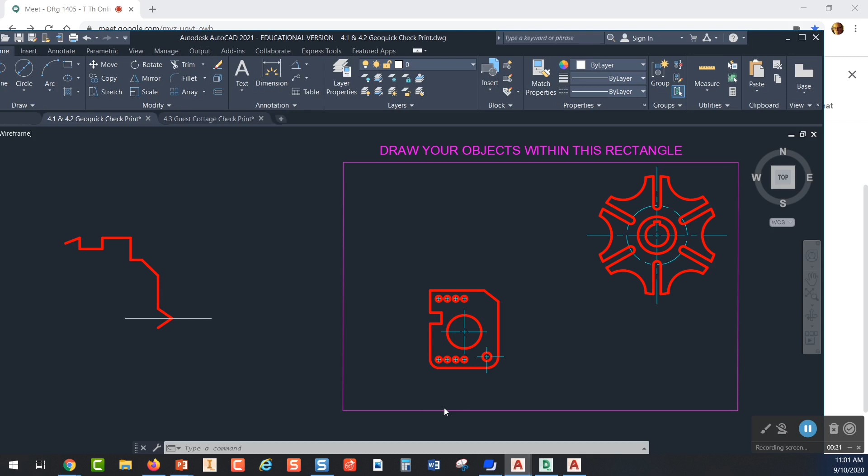All right, so in drawing the Dino Pig, the purpose of that drawing is to throw you into a bunch of opportunities to use the three principal ways that you draw lines. And first of those lines is direct entry. Let me expand my monitor here a little bit. When you're doing direct entry, of course, you pick on a line and you pick a start point, and you just move to the right or the left or up or down and type in a distance and press enter.

It's very simple. But the thing you want to make sure that you're doing to ensure that those lines are truly horizontal or vertical is to make sure that this icon right down here on the status bar is on. And if it's on, it will be blue, and this is called the polar tracking icon. And polar tracking allows you to snap to horizontal or snap to vertical, but it also gives you the freedom to move in between those points.

Now, I want to show you another alternative to that, which is this guy right down here, which is Ortho. And now I don't have Ortho on because I can't have polar tracking and Ortho on at the same time. But when I pick on Ortho, the only place I can go is perfectly horizontal or perfectly up or down or north or south, depending on how you're looking at that, right? So even though I try to move into an area where I would think there would be an angle, AutoCAD just hangs on to that horizontal, or if I go straight up, it will let me snap to north or south.

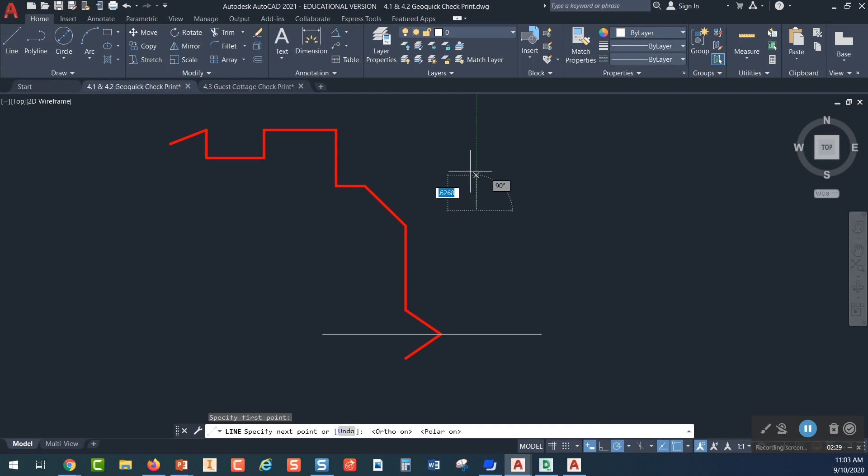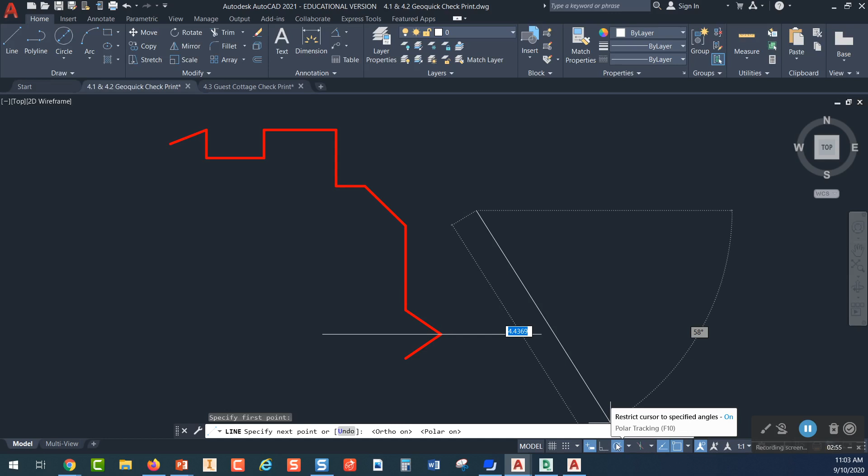So there's a time for this, like if you have a drawing where every line is going to be perfectly north or south, it makes sense that you might have Ortho on. But when you have polar tracking on, you can still get your horizontal and vertical, but you have the freedom to move inside those angles. And so I usually draw with polar tracking on versus Ortho. But one thing I want to point out to you, you can turn Ortho on just by typing F8, and you can see it when you park your cursor on the Ortho mode button, it says F8 there. That's an alternative. And F10 can toggle polar tracking off or on.

The other thing that we need to take away from drawing the Dino Pig and this project, in addition to our direct entry way of drawing lines, is we have to deal with drawing lines at angles. And so, of course, the way to draw a line at an angle is to start a line and type in the distance for that line. For example, if I type in 2, that's going to be my distance, but I have to press the Tab key. And that's what tells AutoCAD that it's going to be followed by an angle. So if I type 30, it's going to be 30 degrees and press enter. So I've got a line 2 inches long at an angle of 30 degrees.

All right. So I'm going to show you, this is part of the Dino Pig right down here. I'm going to delete this guy out. And I'm going to use a dimension, it's called an angular dimension, to show you about this. So when you measure from the horizon to an angle, you can see what the angle is that we arrive at. If we start over here, I call this east because I think about this as a compass. So AutoCAD angles begin at east, and when they're drawn above the horizon, they're drawn counterclockwise, like this right here. So that's 145 degrees.

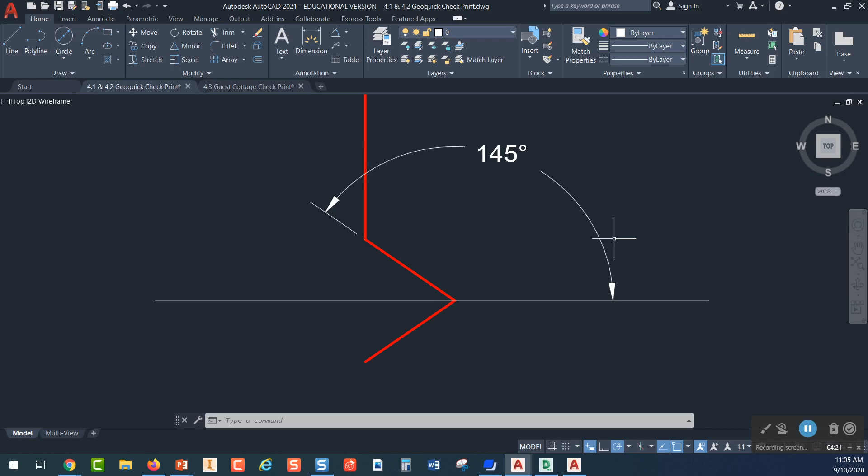The problem happens for us when an engineer gives us this angle and tells us that the angle of this line is at 35 degrees. Well, if you pick on your line command and you type in 0.75, for example, and then you press Tab, you can't type in 35, because if you do type in 35, it's going to go over here, because AutoCAD references its angle off of east.

So what you have to do is figure out what the supplementary angle is of 35. You really need to know what this angle is, and the way we do that is we subtract 35 from 180. So when you have 180 degrees and divide that into two angles, the two angles represent supplementary angles to each other.

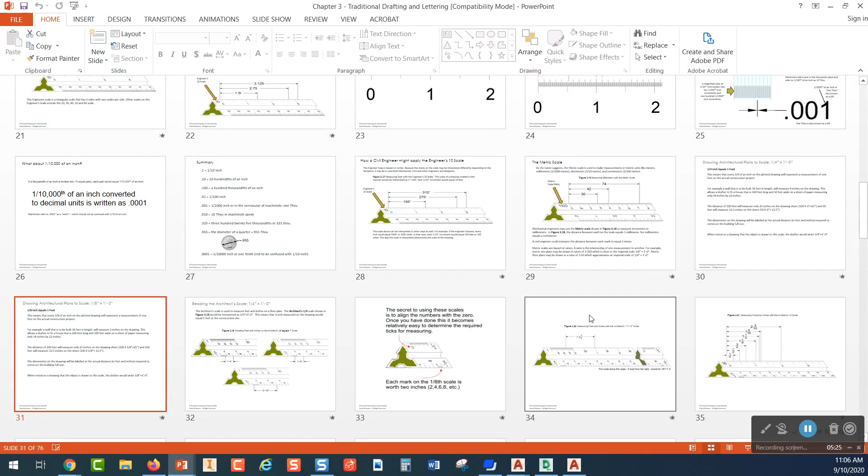I'm going to show you something here. In chapter 2, there was some talk about supplementary angles. You can read about supplementary angles in chapter 2, and this is where they actually start to help you out. But there's a couple of other things in chapter 2 that are helpful.

Those could be the complementary angles. What if the engineer gives you 60 degrees and not 30, but you need to draw this angle right here? Well, you have to know to subtract the 60 from 90 and find the complement, which is the 30 degrees, because that's the angle you're going to be drawing at.

Or sometimes you might get in a situation where you know this angle here, a similar angle like this right here, or you know one over here on the side. And if you use the opposite angle way of looking at stuff, then the opposite angle from that would also be 60. So maybe this is the one you need to know. But the problem here is, even if you're trying to draw this and you know this guy over here, you still have to norm it from east being 0 and draw all the way around over to here.

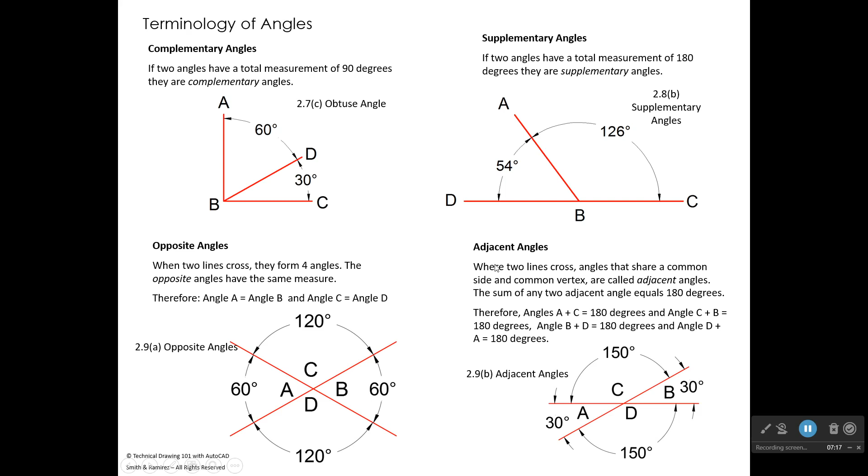So sometimes it's going to be a little tricky to figure out what the angle is when you have to draw it in AutoCAD. Now, adjacent angles are helpful because we have 180 degrees if we draw an arc along a straight line. So if we know the 30 here, we know this is 150, or if we know 30 on this side, we know this is 150 by subtracting 30 from 180. Just pointing that out, that in chapter 2, if you're not really familiar with complementary, supplementary, opposite, and adjacent, that can help you out on some of these AutoCAD problems you'll have.

All right, let's go back to AutoCAD here. Oh, let me see, I want to use this AutoCAD. The other one I had open is actually AutoCAD 2020, and I don't want to use that. I'm going to close that down because you guys all have AutoCAD 2021, or you should anyway.

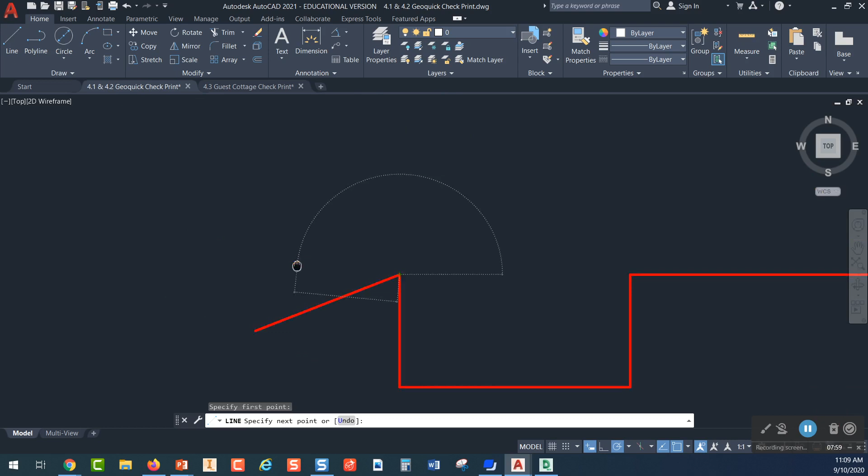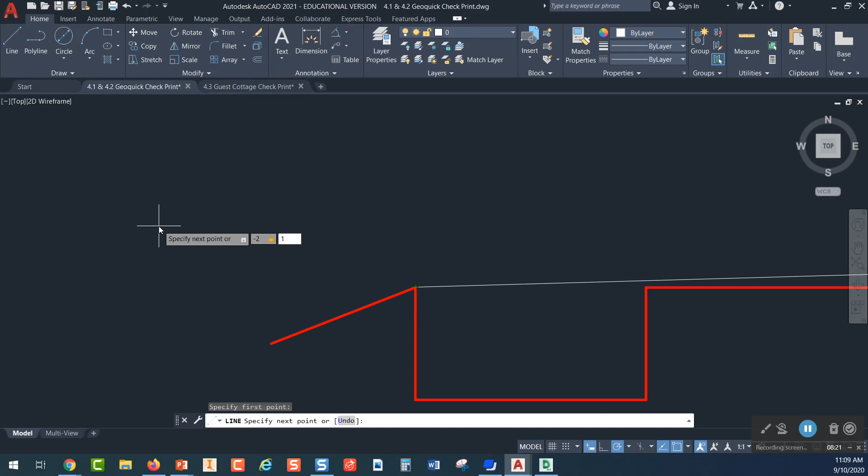The third way of drawing lines is when you start a line, like at a corner right here, and you know you want to go over a distance and then down a distance, or over a distance and up a distance—these are called relative coordinates, and you type in the two coordinates. So if you know you want to go over 2 inches to the left, you have to type -2 and tell AutoCAD you're going in a negative direction. So you type -2, comma, but if I want to go straight up 1, I would type 1 as a positive number and press enter, then press escape. So this line here is found by drawing over -2 and up +1.

So those are the 3 principal ways: direct entry, polar coordinates, where you type the distance, tab, and the angle, and relative coordinates, where you type 2 coordinates in. You're going to have to get comfortable with all that, and it takes a little while to get there.

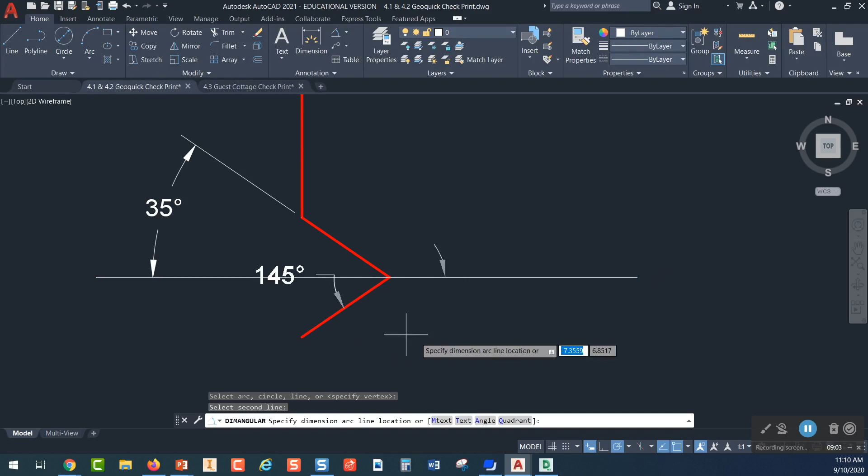Now I'm going to come back to this polar coordinate down here and throw another dimension on here. So when I measure from east to here, when I draw below the horizon, I'm actually drawing clockwise, and when I draw above the horizon, I'm drawing counterclockwise. But AutoCAD generally turns angles counterclockwise.

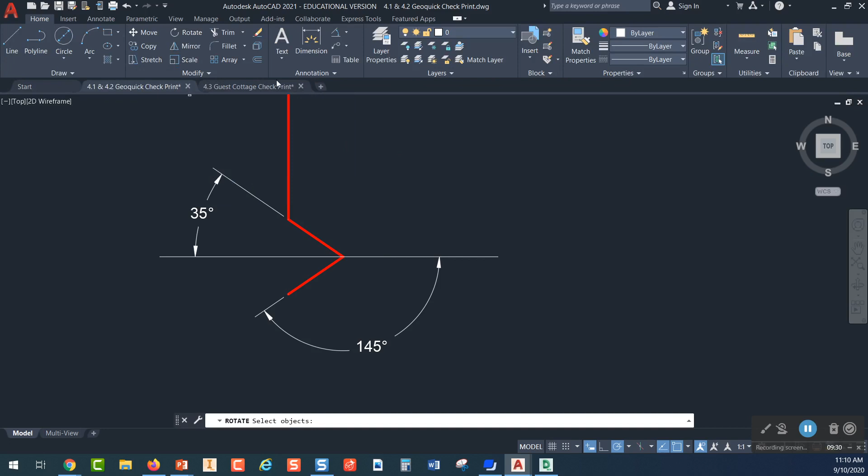So if you want to rotate something using the rotate command, let's pick rotate, for example, and let me pick some of this stuff right here to rotate. I'll press enter. It says select a base point—I'm going to pick right here. Now it wants to know what my rotation angle is. If I type 30, for example, for my rotation angle, it rotates all those parts 30 degrees, but counterclockwise.

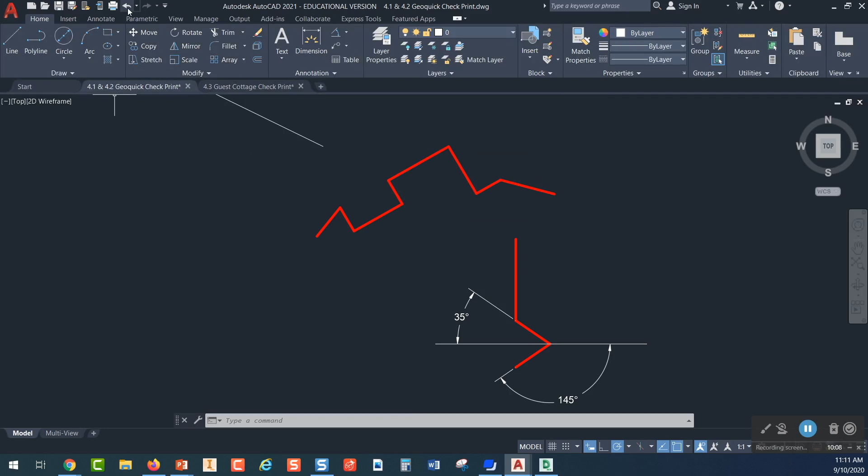So generally when AutoCAD does a rotation, it's rotating counterclockwise. Just keep that in mind as kind of a rule of how AutoCAD does things. Okay, if anybody has a question, feel free to unmute and stop me and ask.

Next thing I wanted to show you guys about are a couple of things related to the next projects we're going to do.

On the screen here are your next two projects, and the first project is this guy right here, which begins on page 216 of your textbook.

I'll give you a second to go over to page 216. Okay, so on page 216 we have this project called the Gasket, and it only has a front view because it doesn't have any thickness to it.

It's really thin, might be 1/16 of an inch or less, so it's more of a drawing exercise in how you accurately place things into a drawing: how do you place circles, holes, how do you put center marks on, things like that.

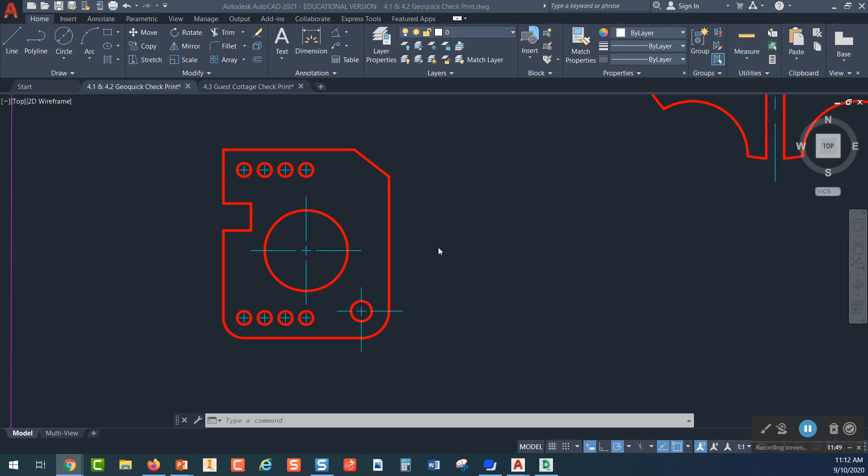There is a video in Chapter 4, Module 2 that will lead you through how to draw this guy right here. There's several things going on in this project I want to point out to you.

A few things you want to make sure you set up in AutoCAD. So if anybody has AutoCAD open on a second monitor, you might want to do some of the stuff I'm showing you.

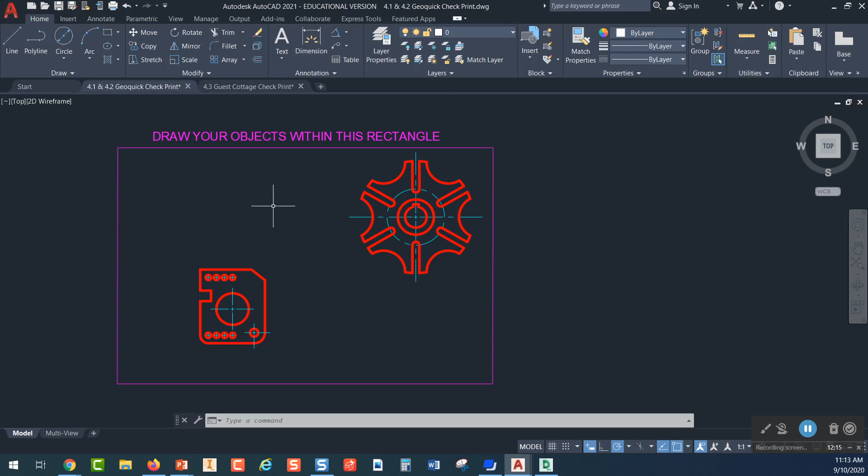Otherwise, there are some videos in the module, Chapter 4, Module 1, that you already looked at. Hopefully you've seen how to set up AutoCAD a little bit, but I'm going to show you a few things.

Whenever you first open AutoCAD, if you look across the top of the screen, you have this one menu that runs across right up here that says Home, Insert, things like that. It's really important that you guys turn on a second menu called the menu bar.

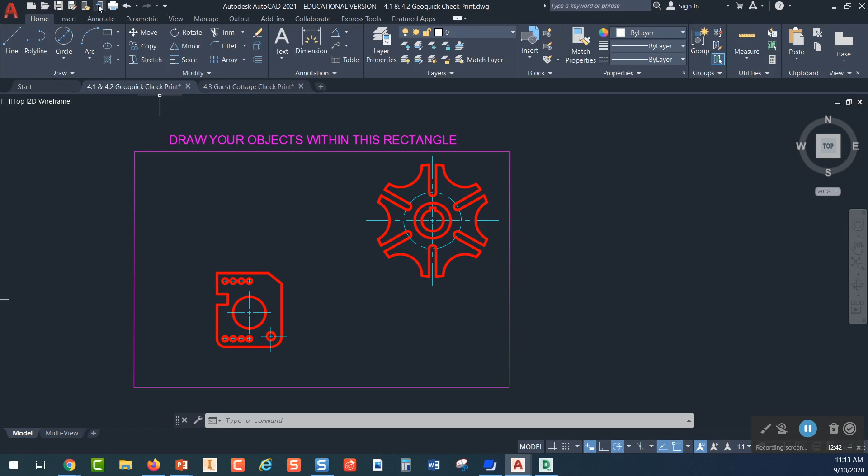The way you turn the menu bar on is you look across the top of the screen, and there's a down arrow right there. Pick on that down arrow and select Show Menu Bar right there.

I'll show you where these videos are so you can go through this. But you pick on Show Menu Bar, and you can see it adds a second menu right above here.

That menu bar used to be a standard menu bar in AutoCAD, and then a few editions ago somebody got the idea to turn that off and make you turn it on. Now once you turn it on, it stays on, but it's a really important tool to have.

So the way I did it, I picked on this down arrow right here, and I picked Show Menu Bar. Now once it's on, your option is to hide the menu bar, which you don't want to do. The second thing you want to do is pick on that down arrow again and pick on Workspace.

When you pick on Workspace, it's going to add this bit of information right up here. This is called your Quick Access menu, and you can add tools to this. But you are drawing in what AutoCAD calls the Drafting and Annotation Workspace.

Another place to find the Drafting and Annotation Workspace is on your status bar, which is down here on the bottom. Now, at this time, I don't see that as an option.

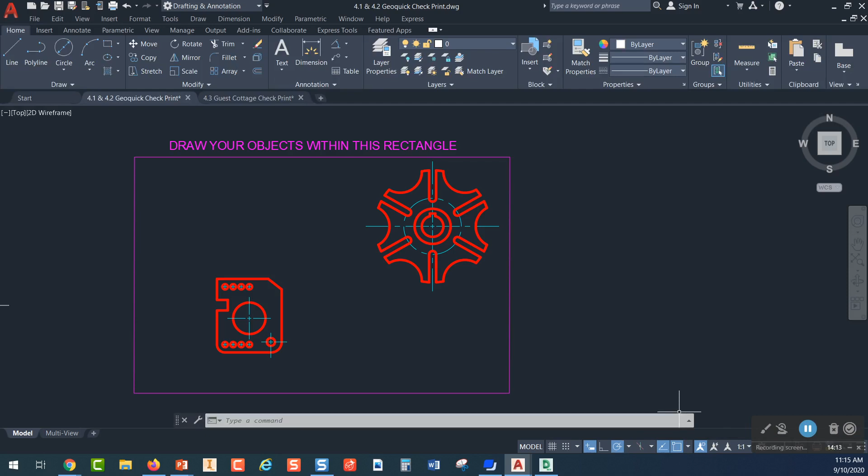So let me see if I can expand this a little bit. That's weird, my screen is expanded so far that it's cutting off. Let me see if I can just drag it over a little bit. Oh, I see what it is, I've got this recorder down there.

In the lower right-hand corner of your screen, you're going to see those three parallel lines on the status bar. So if you're missing tools, you pick on those three lines right there. Now what that does is open up a menu, and you can turn on the tools you want to see on the status bar.

We have a video in Chapter 4 Module 1 that's just called the status bar, and it covers all of this stuff and shows you.

But I'm going to show you, and I may have pointed this out to you guys the other day, but it's important to have these guys on. Let me find this in the book, and I'll tell you what page.

If you look on page 121, you can see an example of the status bar open, and everything that has a check mark by it on page 121, those are good tools to have on. If there's a check mark next to it, it means they're going to be added to your status bar right down here. One of the ones that's really good to have is this guy right here, the one that says line weight.

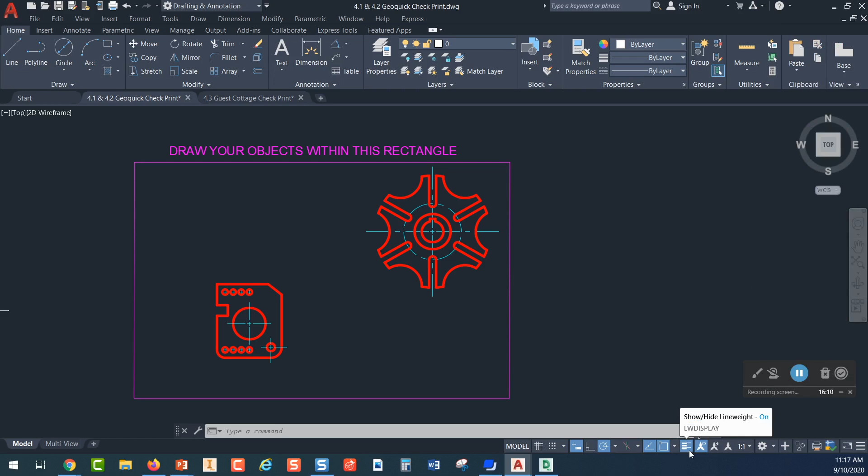So I'm going to pick on line weight, and it's going to add it to the status bar. So when I pick on that, it's actually this guy right here, so I'm going to close this down. All I need to do is pick over here to the side of that. Now this is the line weight tool right here, it's like those three lines. Watch my screen, I'm going to zoom in on this. When I turn that off, you see the difference in the line weights?

So when I have that on, I can see the relative line weights of things. We've talked about that we would have our visible lines thicker than our center lines and our hidden lines. Normally, if this is turned off, you don't see that difference in the line weights, but when you turn that on, it definitely helps you figure out what's going to print thick and what's not. So I can kind of preview and see what to expect when I print this thing.

Now the way I'm getting these different line thicknesses is this. If you look right up here, whenever you open AutoCAD, it gives you a layer called layer 0, and that's the only layer it gives you. You have to make new layers if you want layers, but I'm going to pick on the down arrow next to that. I have made a layer called Viz, which is short for visible.

All of the red lines are on the visible layer, and I'll prove that to you. When I pick some of those red lines, look right up here in my layer box and you can see it says Viz.

Now I'm going to pick on that line right there, and it's on a layer named Cen, C-E-N, for center. So here are the layers that I have: I have a border layer, a center layer, a def points layer which don't worry about, two text layers, a layer called viewport, and one called Viz.

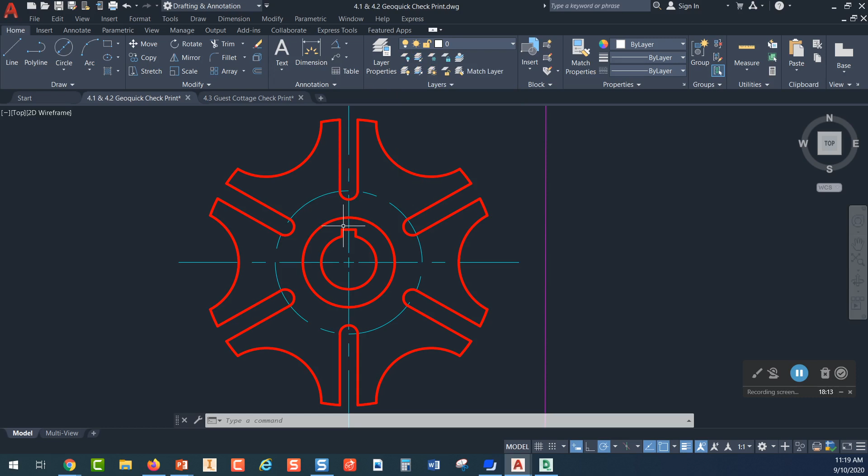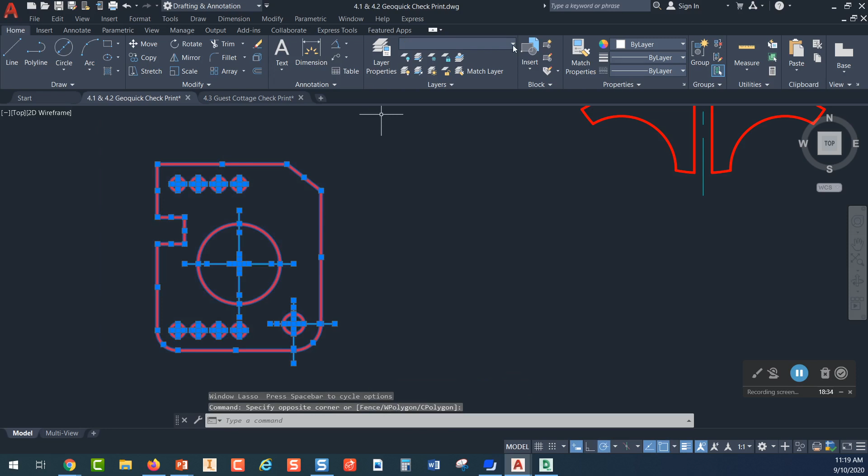Now when you make this drawing that you're going to draw, like I was saying, it's the gasket drawing. We're not going to put it on layers, we're just going to draw it all on layer 0. So to give you an idea of what that's going to look like, if I select all of this right here, and then pick layer 0, that's what it looks like when it's on layer 0. It's not near as nice as when it's all layered and has line weights and stuff like that.

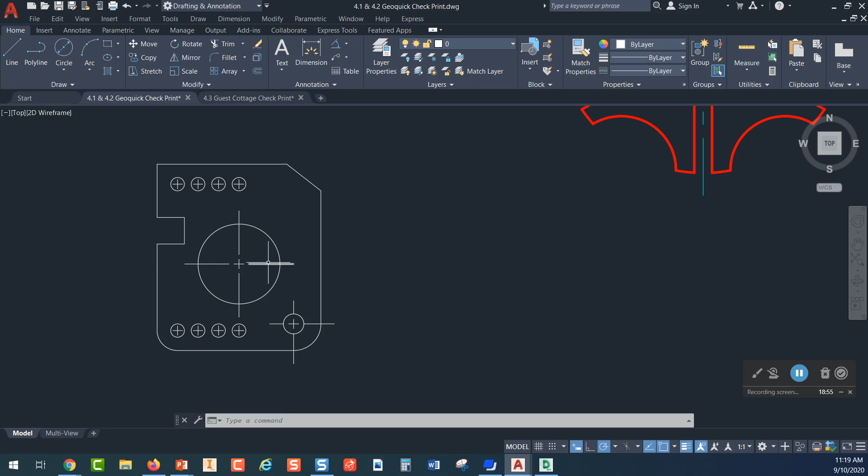But we're going to be introducing you to making layers and adding line weights and making your drawings look better. Now, if I wanted to put this back on those layers, I could window everything, and come up here to my layer control, pick on this down arrow and go pick Viz. Now the problem with that is it put everything on the visible layer. So next I would come in here, and remember, if you pick from right to left, anything that green box crosses is going to be selected.

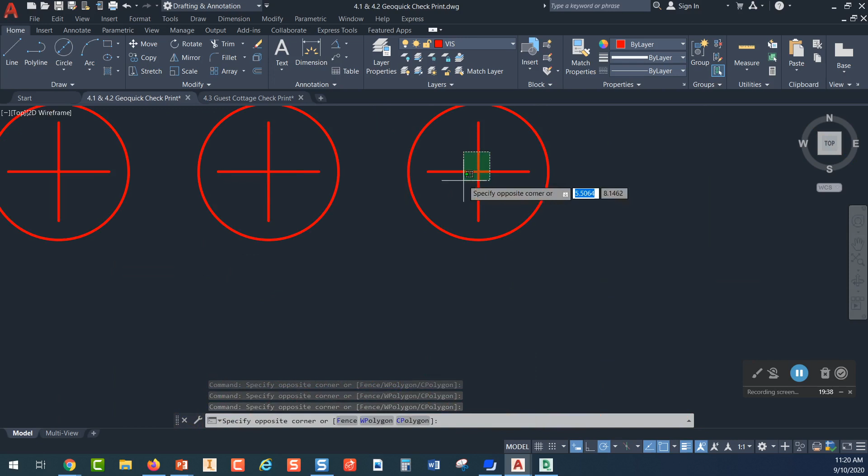So if I come in here and I just pick on all this stuff like this, and then I zoom in here and just do some little right to left pick. So I'm picking once, letting go, picking again. And then I'm going to come up here, pick once, let go. So just drawing a little green crossing window here to select all that stuff. So I've selected all of my center

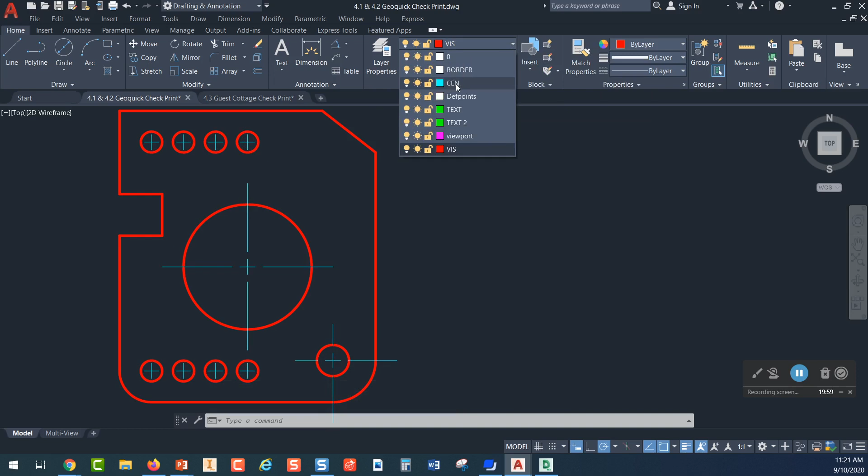lines. So if I go up here to my layer now and pick on that down arrow, and I go to CEN, which is my center layer. I could name it whatever I want. I could have written it out as center, but I was just abbreviating. I picked center. So you can see that those lines have been moved to the center layer, and the center layer has thin lines set to it.

Okay. So by next week, you're going to be comfortable with making layers and doing all this stuff. But for right now, that's some extra layers to add on to what you're trying to learn. So we're not going to worry too much about the layers yet. Okay. To make a new layer, though, what you do is this whole panel right here, this is the layer panel. And if you pick on layer properties, it's going to open up a dialog box that looks like this right here. And so, like I said, AutoCAD gives you layer 0.

But to get a new layer, you're going to pick on this button right here. And if you just move your mouse on there and park it long enough, it will tell you this. And remember, all of this is going to be in a video, so you can watch this. And I'm also recording what I'm doing now, and I'll post this in the recorded videos.

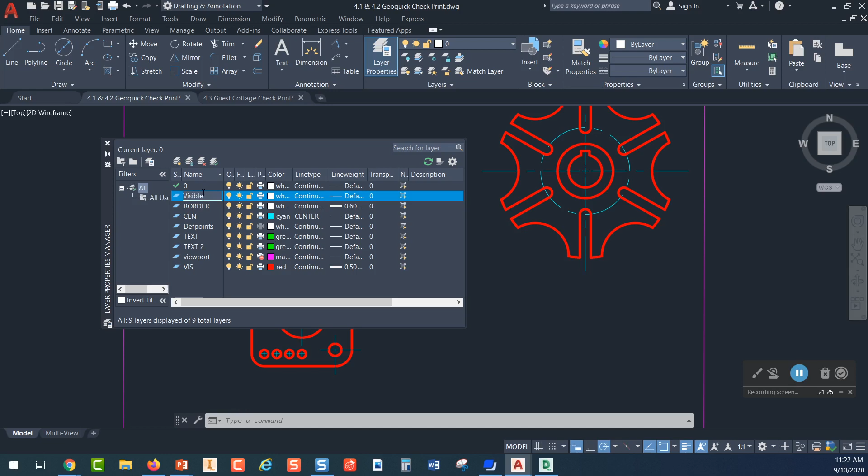So you pick on new layer, and AutoCAD just makes a new layer and names it layer 1, right? And so you can come in here and you could call that, and get to where you guys can see that, visible, for example. And I'm going to stretch this box out a little bit so we can see. Sometimes you need a little more room in between these so you can see what's going on.

All right, so the visible layer that I've made, it's defaulting to white, but if I pick on the word white right there, it's going to open this up. So if I wanted to make the visible layer blue, I could pick on this blue button right here. And what I recommend is choosing these colors down here. These are kind of primary colors, like red, yellow, green, cyan, blue, magenta.

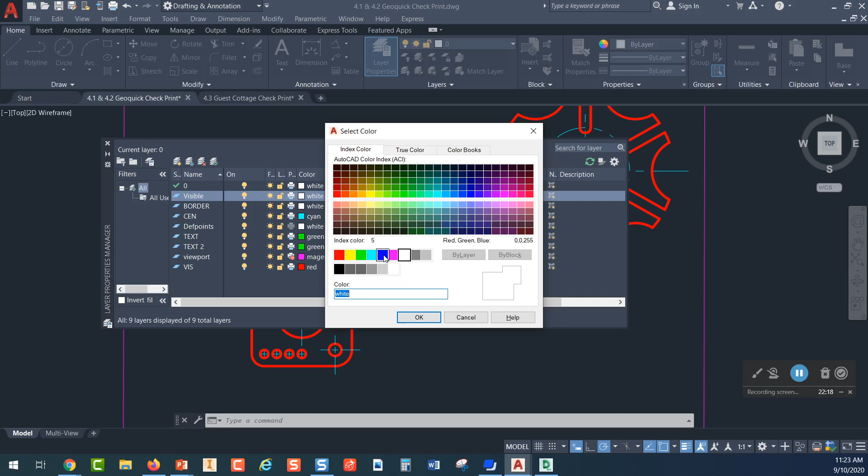Because if you pick up here into the color matrix, your color just has a number assigned to it. And so it's kind of hard to know what the actual color is. When you're down here, you're actually going to get blue if you pick blue. And you pick OK. So now my visible layer has blue assigned to it. Now it's a continuous line, which means it doesn't have any dashes in it.

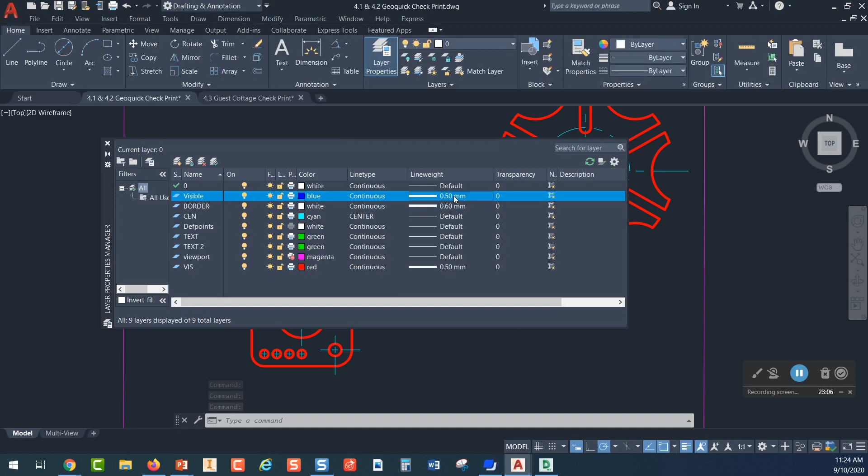And the line weight, remember we said line weight is the thickness of a line? If I pick on line weight, right now it's default. Default line weight is about 0.25 millimeters, which is thin, about 1/4 of a millimeter. So I'm going to pick on default, and I'm going to scroll down, and I'm going to pick 0.5 millimeters instead of 0.25 millimeters and pick OK. All right, so now I've made this new layer. It's blue, it has continuous lines, and it's 0.5 millimeters, so I can close this down.

Now, I come back up here to where my layer is and pick on this down arrow and choose visible. That's the new layer that I just made. And now I go over here to the line command, and you can see that blue line I'm drawing. That's because it's blue, it's on the visible layer, and it has a thickness of 0.5 millimeters.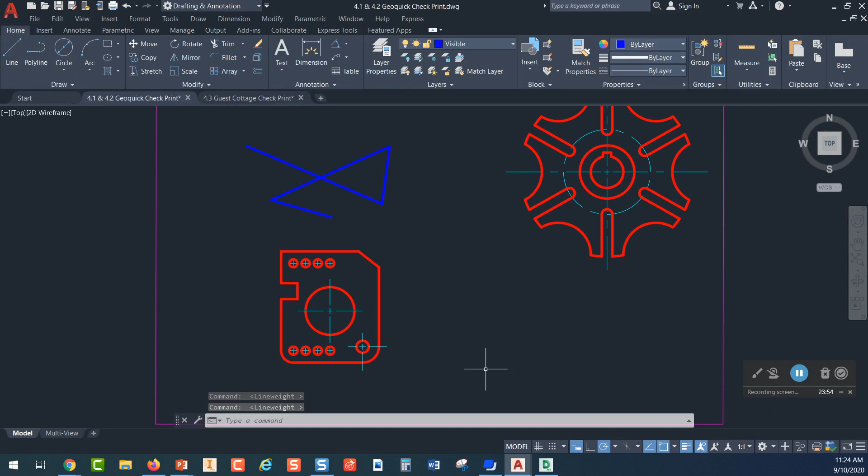Now, remember, in order to see line thickness or line weight, down here on the status bar, if you unclick that, it turns off your line weight. So you don't have to draw with line weight on, but it's good to occasionally turn it on so that you have an idea of what's going to print thicker than other lines. All right.

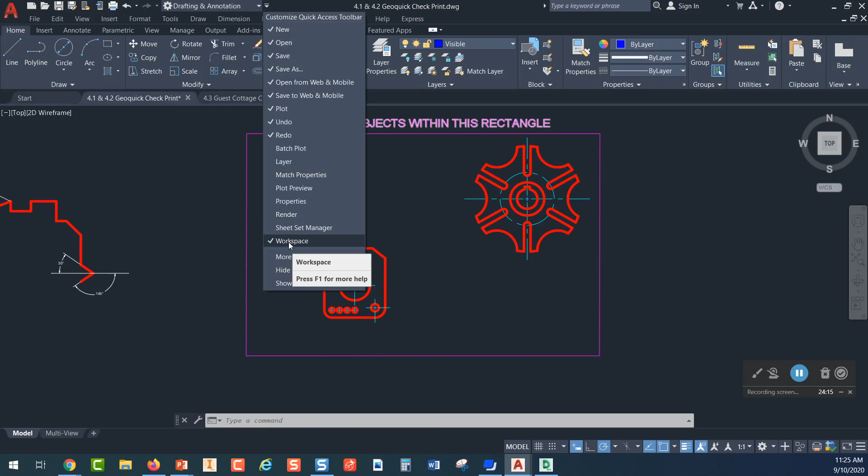Okay, so before you start drawing this guy right here, and before you draw this, I want to point out a few things to you. First off, like I said, I went up here and I picked on this down arrow, and I turned on show menu bar, and I turned on workspace. Now, the next thing I want to show you is, you see this button right up here that says Format?

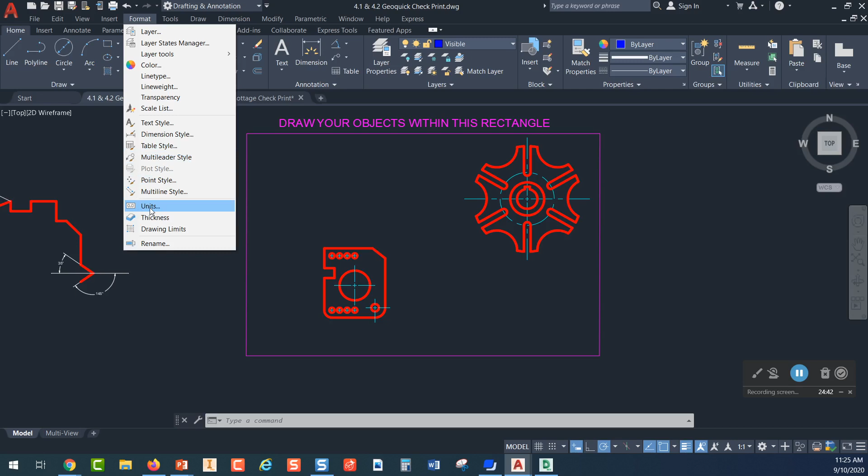This is a really important thing to remember because Format has a lot of settings in it. So when you pick on Format, one of the things that you can change are what are called the units of your drawing. So I'm going to pick on this word Units right here. You can also type units and press enter. When you type units, it opens up this little dialog box, and right here you're told what the units are that you're drawing in.

Now, right now I'm drawing in decimal units. Decimal units are like inches and decimal inches, all right? So this is probably what I'd want to be in if I were making a mechanical drawing. Does that make sense? Because you're doing inches and decimal inches. But let's say I was going to make an architectural drawing. I don't want to draw in inches and decimal inches in an architectural drawing. So I'm going to show you again how to do this, because it takes a little while to get the hang of this.

You go up to Format, you pick on Units, and it opens this guy up, and it's generally going to default to decimal, but if you pick on this down arrow right there, I can choose architectural units. Now look at my units. They're now in feet and inches. So if I were going to start typing in coordinates or lengths of lines, I would want to type those in feet and inches now. So this is what architects use.

And the assignment that's going to be due next Tuesday is actually going to be 3 drawings, and one of them uses architectural units. One is a small floor plan. So the first 2 drawings, this is the first drawing, this is the second drawing. They look much more complicated than they are.

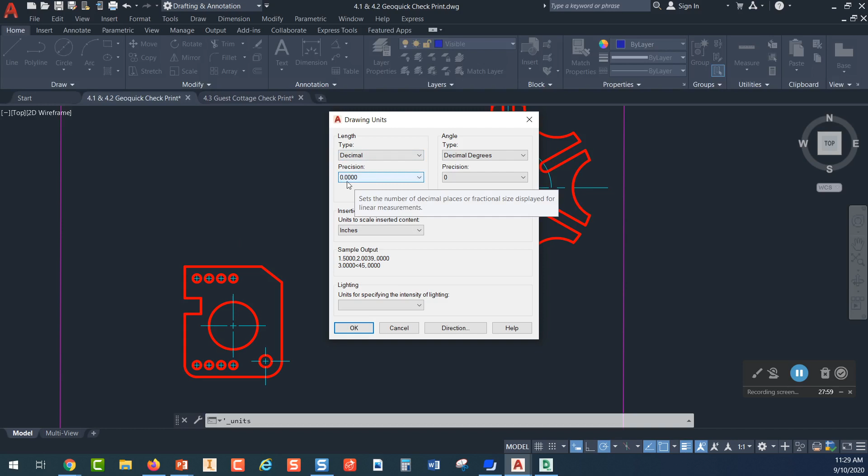So I'm going to go back to Format again and pick on Units. So I know I want decimal inches, but here's my precision. And you can see my default precision is going to 4 decimal places. If I pick on this down arrow right here, I can set that to 3, because I know I don't need anything greater than 3 places of precision on this drawing. So what this means when you have 3-place precision is this: if you tried to type in a dimension that had 4 places of precision, AutoCAD will just round it to 3. It won't show it at 4 places. So just so you understand what precision is.

But, you know, if you looked at that drawing at the top of page 216 and you had some dimensions that went to 4 places, you would want to make sure that your precision was set to 4 places in your units. Okay. Now, when we go to architectural, if you look right here, my precision says 1/8 of an inch.

So what that means is if I tried to put in a dimension to 1/16 of an inch, it wouldn't allow that. It would round it to the nearest 1/8 of an inch. So if I wanted 1/16 inch to be my precision on my drawing, I would pick on the down arrow, and I could come over here and choose 1/16.

But you know, in architecture, 1/16, that's really tight tolerance when you're working with lumber that's curved and all sorts of stuff. It's kind of hard to hold those tight tolerances like you would on a machine if you were making a machine part. Okay, so I'm going to go back to decimal.

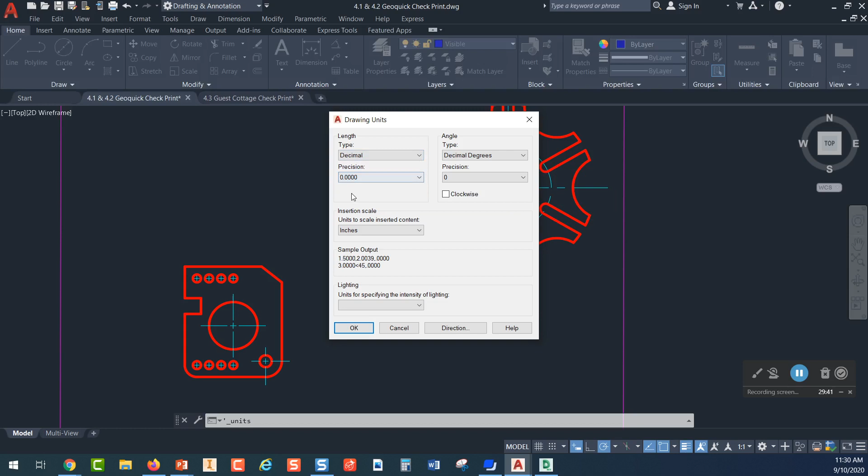So when you get into this project, look on page 216, and in step 1, direction number D, it says set the units to decimal. So that's what it's referring to, is picking format and making sure that your units are set to decimal.

And then in F, it says set the text style font to Arial. Okay, so we haven't looked at that, and that will be covered in the video. But again, you see this format. This is important because when you pick on format, that's where your text style settings are too. So if you pick on text style, you get this dialog box that opens up, and the text style that is the default is called standard. So we don't need to change that.

But what F says is set the text style font to Arial. Here's your font over here. And if you pick on this down arrow, you can see all the fonts that AutoCAD has. And I think what's going to happen for you guys is that the font that's going to be set there is TXT. It's this guy right here. And here's an example of what that font looks like. See how simple that font looks? It's a nasty looking font, but that's what AutoCAD is defaulting to.

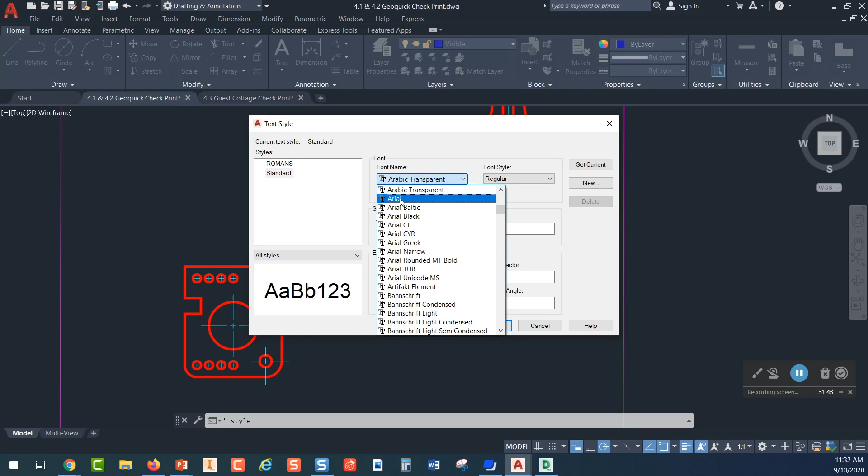Now look at Arial. See, that's a decent, hard-working font right there, not that TXT stuff, okay? So I want you to look and say, now, I like that font. That's a good Gothic font. So we're going to keep the text style name as standard, but we want the font name to be Arial. Now I'll show you some other things we could do.

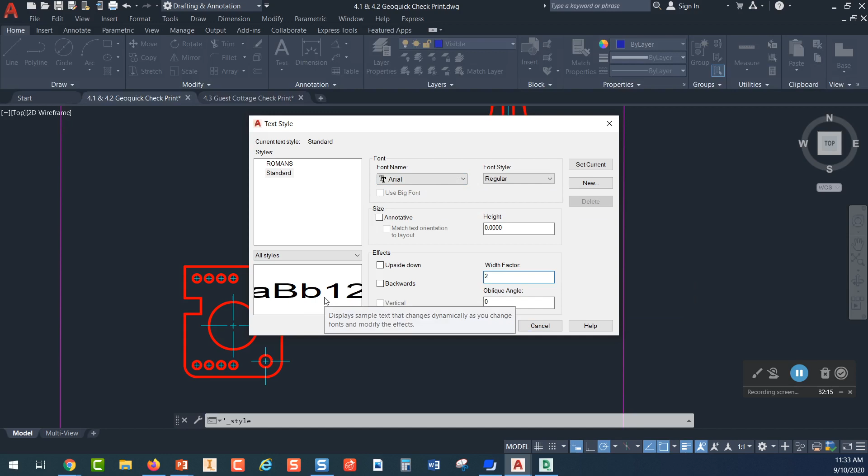Look right over here on the width factor. If I highlight that, if I were to type 2 right there, what it does is it stretches those letters 2 times. So what we're doing is we're taking a text style that we're calling standard, and we're customizing it over here. So we don't want to call this thing Arial. We can just keep it as standard, but the properties of standard are Arial. And right now the width factor is set to 2.

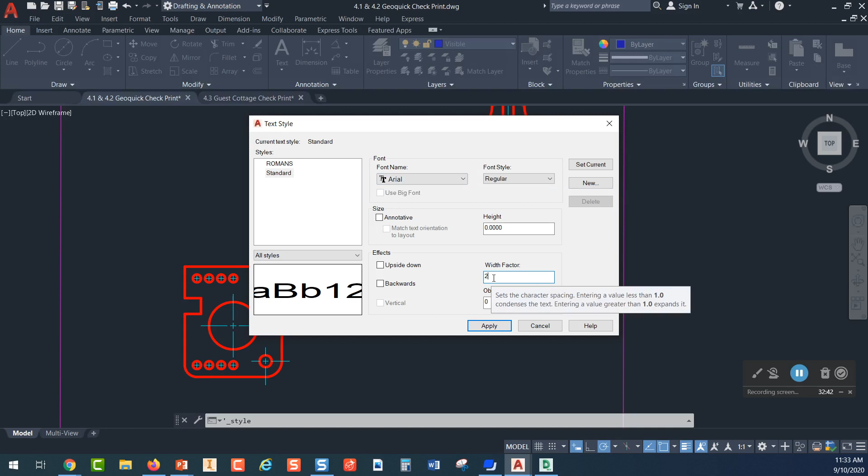I'm going to set that back to 1, because that's normally what we have it at, is just 1. But this is how you create a custom text style.

All right. And by the end of the semester, you'll get all this. So I know right now your short-term memory is getting bombarded with tons of information. But you're going to do this over and over. And don't worry, we've taught thousands of students how to do this. So just hang in there, and you're going to get this over time, because we're going to repeat a lot of this.

So anyway, all of that is coming out of format. So that's an important thing to remember. And remember, here's why it's so important: AutoCAD doesn't even show you that format tool up here if you don't turn on the menu bar.

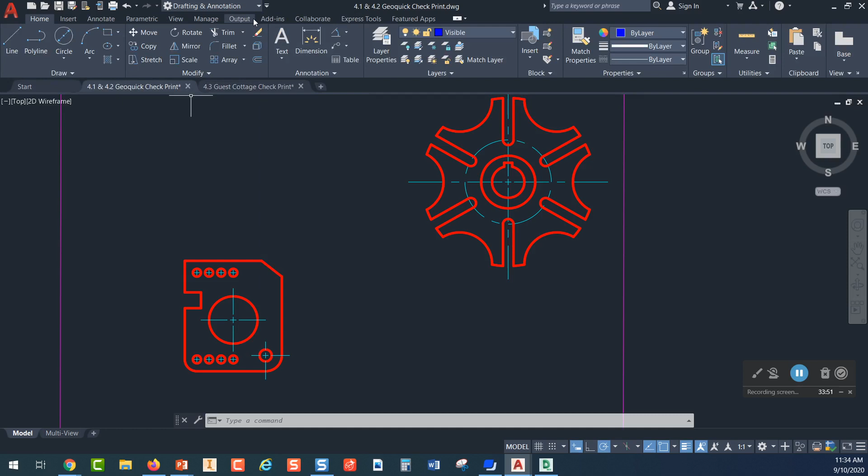So I can't imagine what the decision at Autodesk was when they decided to turn off the menu bar, because it's such an important set of tools. Well, here's what I think. I think there are no drafters at Autodesk, right? There are a bunch of programmers over there, and they make these decisions. And then drafters go, what in the heck are they doing? So you come over here and you pick show menu bar, and now you've got it, all right?

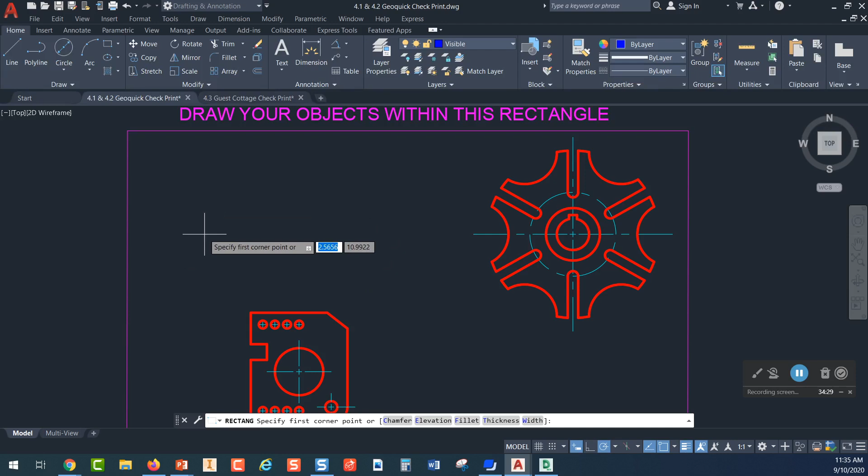All right, so quickly I want to show you some of the commands that you're going to be using. One of them is the rectangle command. So you pick on rectangle, and if you look in step 2, direction B, it says specify the first corner of the rectangle at 4,5. So what it wants to know is, where do you want to start this rectangle? So you would just type 4,5 and press enter, right?

And you can see that I've got a rectangle right on top of the rectangle that's already there, but that lower left corner is at 4,5. Then you want to just move out in the direction that you're going right here, and in step C, it says when prompted to specify the other corner, type 3,3.5. So I'd type 3,3.5 and press enter. And you see that blue rectangle.

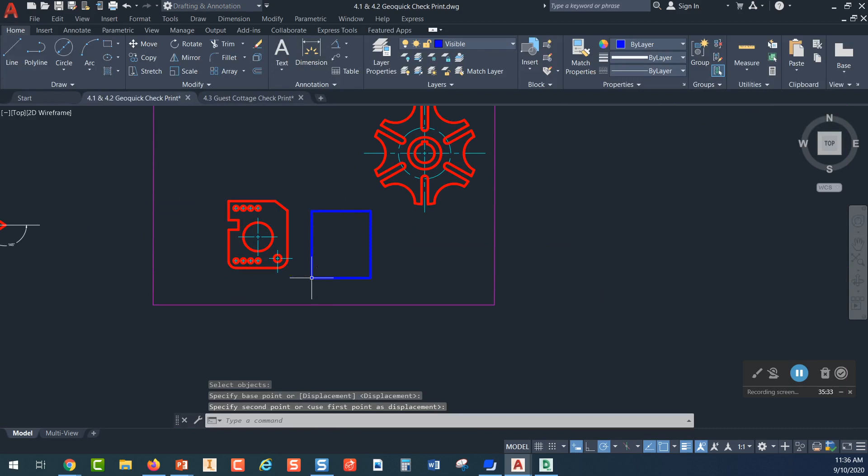So you start this drawing by creating a rectangle. And then you're going to edit that rectangle. So we're not even drawing it using the line command. You're going to be surprised how few lines we actually draw. We're going to use things like rectangles and copies and offsets and stuff. So what I'm going to do is press escape, and I'm going to move that rectangle over to the side. Let's just move it right there and kind of zoom in on it.

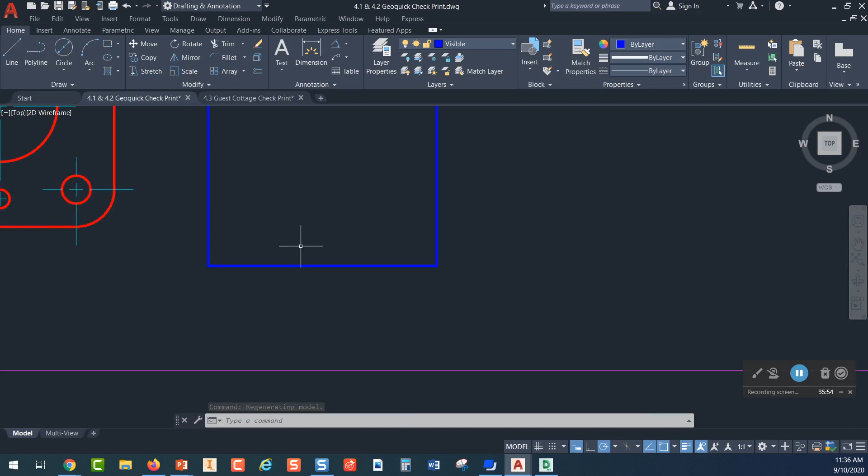Now remember, when you zoom, you're just rolling the wheel of your mouse, and then you can hold down on the wheel of your mouse and you can pan. When you draw this, you should be this close right here. You should not be trying to draw with your drawing out that far, right? You want to zoom in and pan and get close to it so it's easy for you to see what's going on. Now, the next thing it tells you to do in here is to explode this rectangle.

So when I pick on a rectangle, it's one entity made of 4 lines, but it's not broken into 4 lines, it's one entity. And so the directions on D in step 2 say to explode it, and that's in the modify panel. So this is your modify panel right up here, and you pick on explode. So you can pick explode first, and you can pick that and press enter. And you don't see anything happen except when you go up here and pick on it, you can see that it's broken into 4 lines now. It's not one entity anymore. And that's what we needed to do, because we're going to do things with these lines individually. Okay, and we don't want it behaving like one entity.

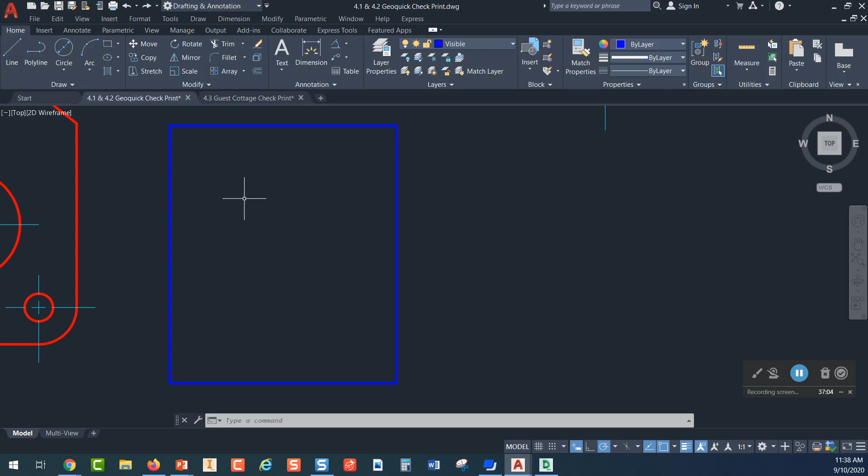Now I'm going to do an undo and turn it back into one entity again. So the way I exploded that was I picked the explode command, and then I picked that and pressed enter. But in AutoCAD it doesn't really matter the order that you pick things in. So I could have exploded that by doing this. I could have picked the rectangle and then gone and picked the explode command. And when you do that, you don't even have to press enter. It just explodes it. All right.

So the order matters. So if I'm going to pick explode, look at AutoCAD, it says select objects. You pick that, but it thinks you might want to explode some other things. So it keeps asking you to select objects until you press enter. So that did explode it, but I had to do that extra step. Whereas if I knew I wanted to explode this guy, if I want to do it quicker, I would just pick on the rectangle and just pick, okay, explode that. And it's done. I didn't have to press enter.

So, over a full day of drawing, you don't want to be making all those extra steps. So eventually you learn, hey, this is the more efficient way to explode things, or whatever it is that you're trying to do with those sorts of things.

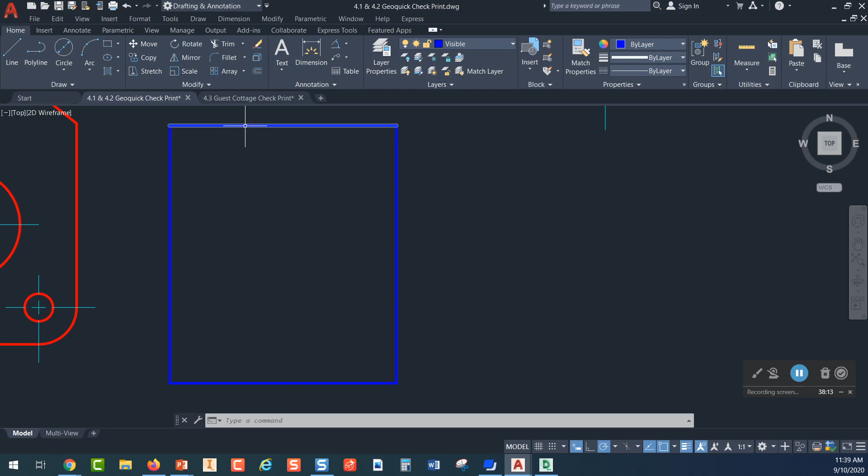So we drew a rectangle and we exploded it into separate parts like that. Now, I think what I'll do is I'm going to change the color of this guy to just white. So maybe that'll be easier for you guys to see what I'm doing here.

All right, so the next command, this is a command you're going to use all the time. It's this guy right here, looks like a horseshoe. That's the offset command. When you pick on offset, look what it says next to your cursor. It says specify the offset distance. We're going to type 0.5 and press enter. Once you've pressed enter, it says select the object to offset.

I'm going to pick this line right over here, and then it says specify a point on the side to offset. So here's the deal. AutoCAD will offset that line 1/2 inch, and it just depends on which side I pick. So I want to move to the right. I can move anywhere to the right and pick with my left click button. And what it did, it took this line right here and made a copy of it 1/2 inch away. It offset that 1/2 inch away.

All right. And so I'm still in the offset command. So I could pick another line and I could offset it. And I could pick another line and pick above it. And I can pick this guy over here. So that's how offset works. You stay in it until you press escape. And once you press escape, you're out of it. All right. So now I've got like a Frank Lloyd Wright style window going on.

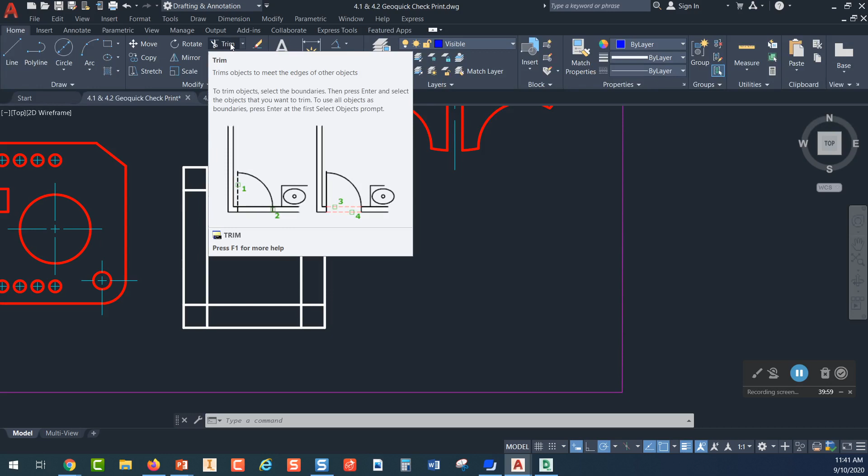Now I want to show you a command that's really helpful. Just like offset, you're going to use it all the time. There's offset. You see the scissors up here? Trim. Pick on trim, and then it says select the object to trim. Well, if I want to trim any of those lines, all I have to do is go in there and pick on them. And you can see they trim between, like this line right here is not going to erase the entire line. It's going to be trimmed to that vertical line right there.

So trim is not like erase. When you erase something, it erases the entire line. See? But when you trim it, it trims between the two things that touch it, and then it can trim there and it can trim there. All right, so offset and trim, very important commands. You're going to get to use them a lot, and they're covered in the videos as you go through it.

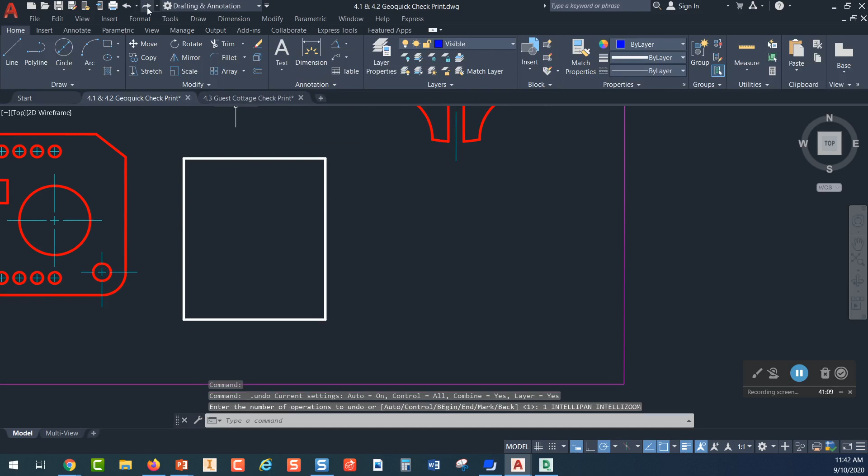Now, for you guys who took this class in the spring, and I know there's a couple of you, in earlier versions of AutoCAD, trim didn't work this way. And so I'm going to do an undo and get back to where I was. In earlier versions of AutoCAD, when you picked trim, you had to press enter, and then you could start trimming. Well, you don't have to press enter anymore.

Now, the reason I want to point that out to you is you're learning with AutoCAD 2021, but you might get a job next year at a company that uses AutoCAD 2020. And so trim would not work the way it works now if you were using AutoCAD 2020. You would have to know to pick trim and press enter. All right. So I've been picking trim and pressing enter for the last 20 years. So it's going to be hard for me to break that habit.

That's why I hate Autodesk. They do this stuff just to mess with you.

But anyway, I'm going to erase some of these things out, and I'm going to show you what's going to happen, though. So remember, we offset this line 1/2 inch right there. The directions are going to say, do another offset and set the offset distance to 2. I'm going to press 2 and press enter. And then it says select the object to offset. And we're going to pick the bottom line.

And then we're going to pick anywhere above that, and we just offset that line. So we took this line right here and made a copy of it 2 inches above it. Now we're going to go in and change that. We're going to do another 1/2 inch offset.

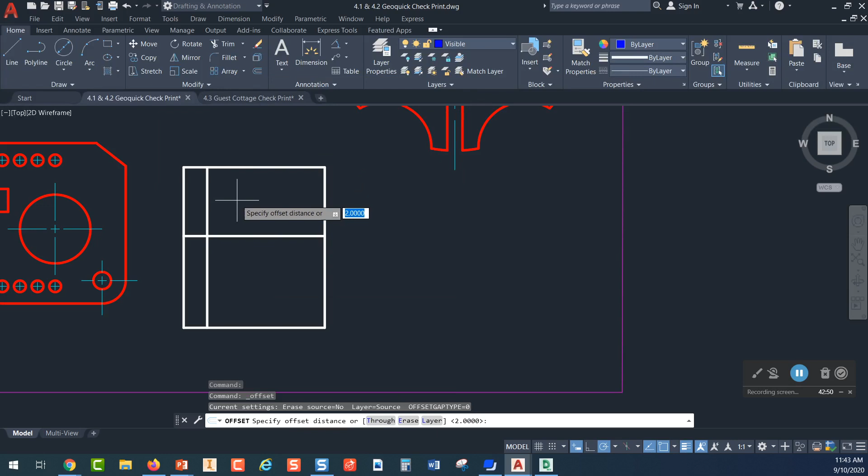So we're going to pick right here on offset. And again, it says specify the offset distance. Now look what is in the blue—it says 2, because AutoCAD remembers the last value you put in there. So I'm going to type 0.5 and press enter.

And this time I'm going to pick this line right here, and I'm going to pick above it. And that's the last offset I need to make for right now. So I want to escape to get out of the offset command.

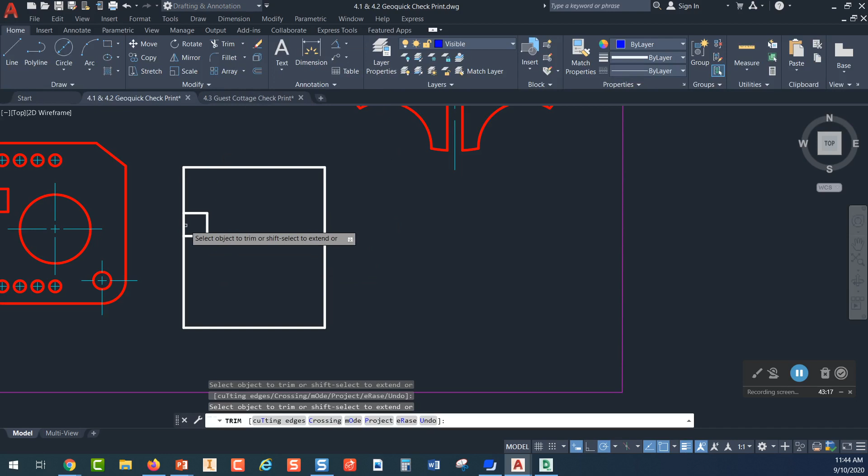Now I'm going to pick the trim command, and I'm going to trim that line right there, this line, this line, this line, and this line. Okay, do you see that notch we got over here? So that's how we get to that notch. And so you're going to learn a whole bunch about offset and trim as you do this, and that's going to help you later on.

Now, look right down here. We have a filleted corner. You see that rounded corner we have right there? And I'm going to turn in the book and show you where that one is located at.

It looks like that's in step 10. So I'm going to jump over to step 10, and it says use the fillet command to put a radius in there. And in step B, it tells you that the radius is 0.5 for that.

So here's how we use that. Right up here in the modify toolbar is the fillet command. When you pick on fillet, AutoCAD says select the first object. The problem is AutoCAD doesn't know the radius. It's like it's ready to fillet, but it doesn't know what to really do.

So what you have to do is this: instead of trying to pick these 2 lines to fillet those, you need to come right down here on the command line and see it says fillet. Go pick radius. And then look what AutoCAD says—oh, specify the fillet radius, and you type 0.5 and you press enter.

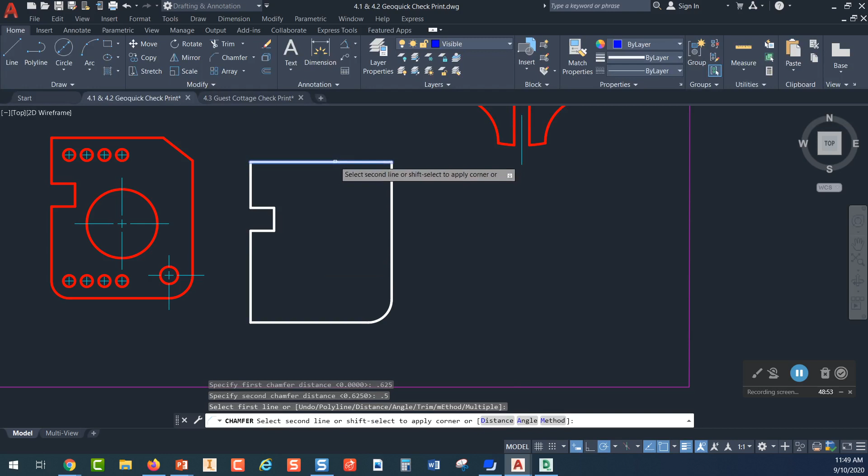Then it says specify the second chamfer distance. I'm going to type 0.5 and press enter. And then it says specify or select the first line. The first line's the one that needs to have the 0.625. So I'm going to pick the top line, and then I'm going to pick the vertical line over here. So it chamfered in 0.625 and down 0.5.

So we used the rectangle command, we used the offset command, we used the trim command, we've used the fillet command, and we've used the chamfer command. We haven't even used the line command to get where we are.

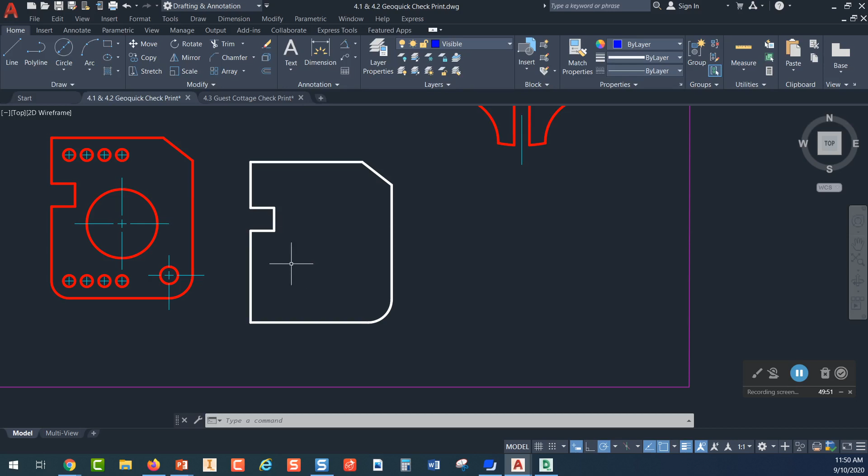So this is how you draw in AutoCAD. It's not exactly like you think you would draw in a bunch of lines. A lot of times you start by drawing things like rectangles and then edit them and stuff. And so if you watch our videos, we're going to teach you how we see this stuff being drawn. Where if we just turned you loose on it and told you to draw this, you would have probably started by drawing a line and then drawing another line. You might have gotten there, but you would have gotten there the slow way. So we're trying to show you how to think like a real CAD drafter would do this kind of thing.

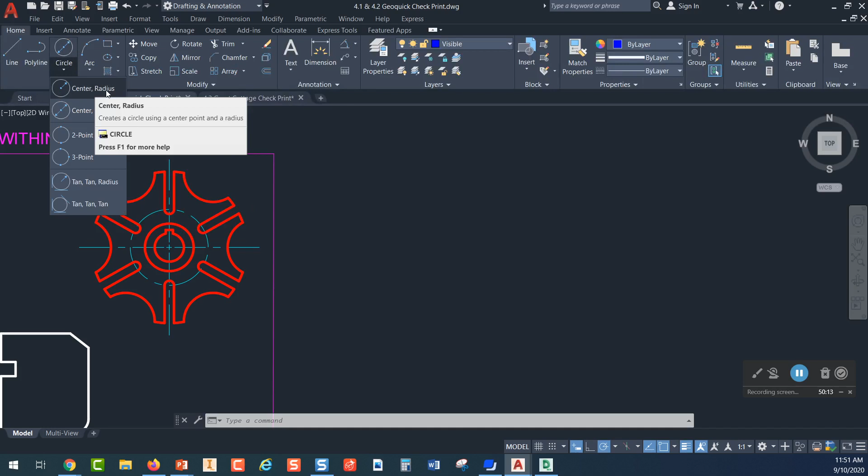Right now, this guy up here looks really complicated, but just to make sure that you're not too afraid of that, I'm going to pick on the circle command, and I want to show you something about circle. If you pick on the down arrow right here, you can choose to draw a circle using its center point and its radius, or its center and its diameter.

Most of the time when we're drawing a circle, we know what the diameter is. So I prefer to pick center diameter. And once you pick center diameter, that's the one that will become the default on top. So the next time you pick it, you're going to be in center diameter.

When you pick center diameter, it asks you to specify a center point. So in AutoCAD on this next assignment, it tells you to draw that center point at 14, 11 and press enter, and you can see that I've drawn it right there where the center of that cam is. And then it tells you that the diameter of that should be 6. So all I need to do, because it's asking me specify the diameter, if I type 6 and enter right now, you can see that blue circle that I just drew.

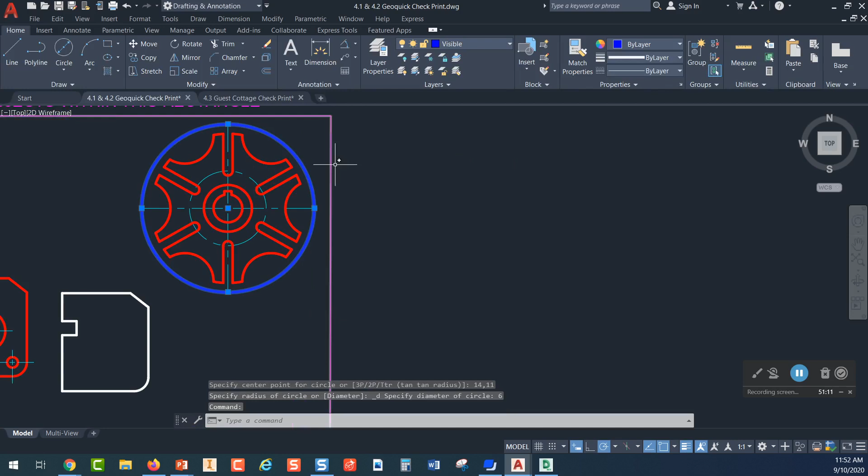So I'm going to move that circle out and show you a couple of things, just to show you how simple this is going to be. I'm going to draw another circle, and I'm going to snap to the center point of that. Now, when I want to snap to the center point, I pick on this circle command, and I go in here. If I can't find the center, if I move near the edge, the center will light up because it will tell me where the center of that circle is. Let's say I pick right there, and I draw my next one 5.33 in diameter.

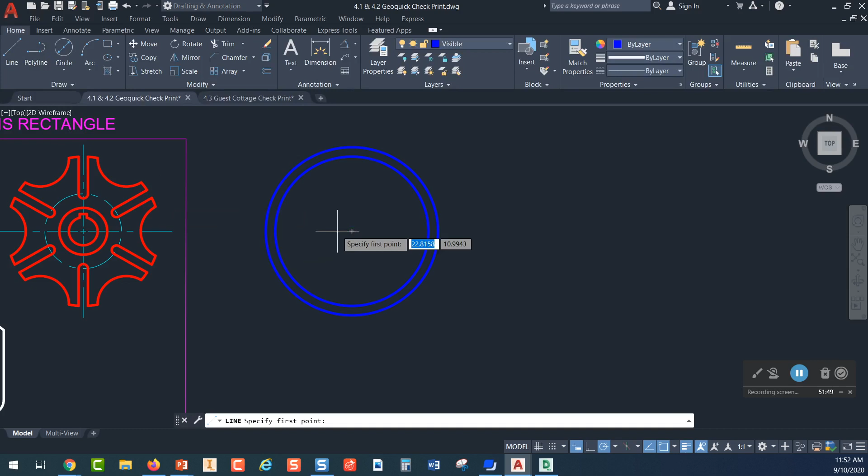Now, I'm going to draw a line across this guy, just draw it out like that. So I have a construction line out here. I'm going to draw a circle, and I'm going to snap to that intersection right there, and I'm just going to come out. I'm going to draw it 2 in diameter.

This video is going to show you how to use a command called array. I'm going to pick on the down arrow. This is called a rectangular array. You see those 4 boxes right there? If you pick on the down arrow, you have the option to do a polar array.

I'm going to pick on polar, and it says select the objects. It wants to know what objects you're going to array. So I'm going to pick this guy right here, and then press enter. It says specify the center point for the array. That's going to be the center of those circles. And look at that. See, that's what a polar array does.

Now all I have to do is look up here in the ribbon, and it says items. That means how many do you want? So I want 6. So all I have to do is type 6 right there. If it doesn't default to 6, I think it's going to default to 6 anyway.

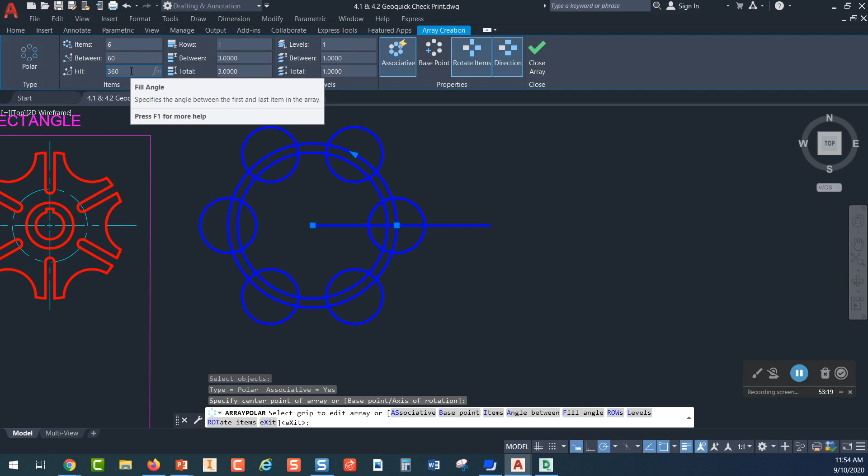It says what's the distance, or what's the angle between each of those? You could say 60 if you want, or you have the option here, fill. So by having 360, I'm saying I want to fill that full circle. Either way, all I need to do is come over here, uncheck associative, and pick close array. Okay, so I made an array of those guys right there.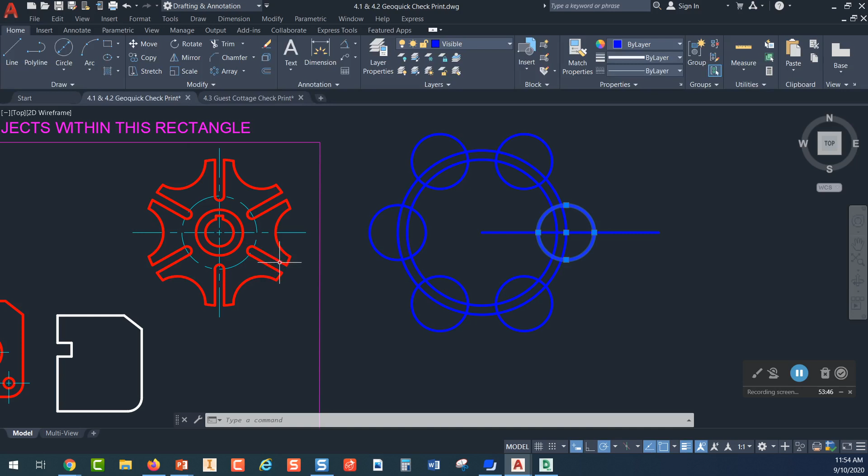That's what you're going to learn in this exercise: how to draw a circle over here and array it, and then trim it. You're going to get good at using array and trim and stuff like that. So what I would do next, let me just make those white, make them a little easier to see maybe. I would pick on my trim command, and I would trim.

Between using trim and erase, I could work my way around and just start trimming all this stuff. Okay, it looks like I erased one of mine out. But you see where I'm going with that.

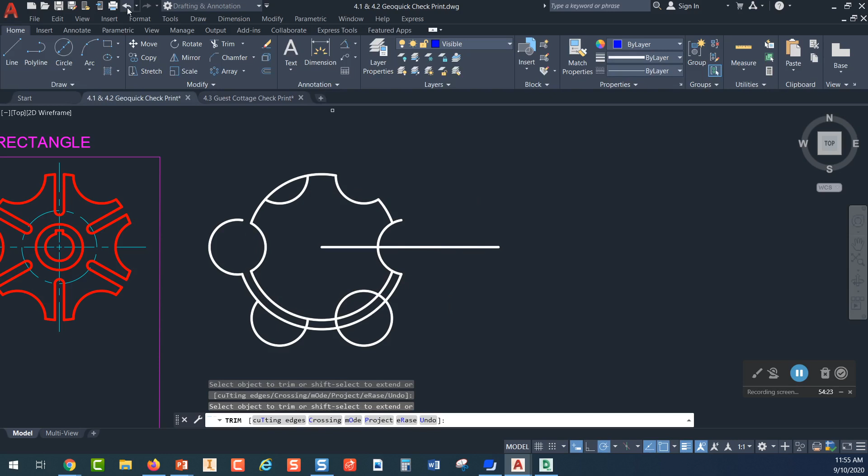It's like this trim and array thing that you're going to do over and over several times to create this shape right here. And while it looks like that's going to take a long time, it really doesn't, because once you get some of it constructed, you just start doing arrays and trims, and it goes pretty fast.

So that's your first assignment. These are projects 4.1 and 4.2. I'm going to show you Blackboard in just a second, where to find these things. Now, your third assignment, because these are not going to take very long to do, starts on page 226.

I know that a lot of you are interested in architecture, so let's draw something. What we have here is this little guest cottage, and there's a floor plan. There's a sketch that maybe an architect has made, and you're the drafter in the office. So the architect comes over and hands you this sketch and says, I need you to CAD this up, I need you to draw this in AutoCAD.

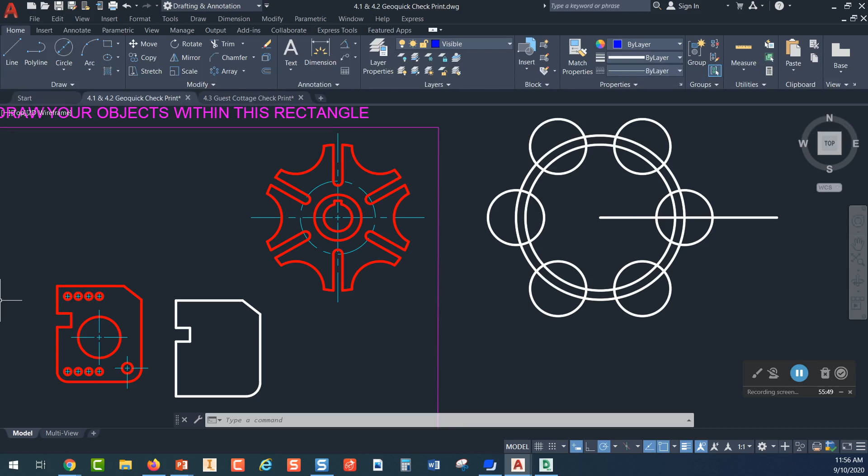So one of the first things you're going to think about is, what are the units that you should be drawing in? You think they're decimal inches? No, they're not decimal inches. So let me go click on this guy right here. This is what it's going to look like when it's drawn.

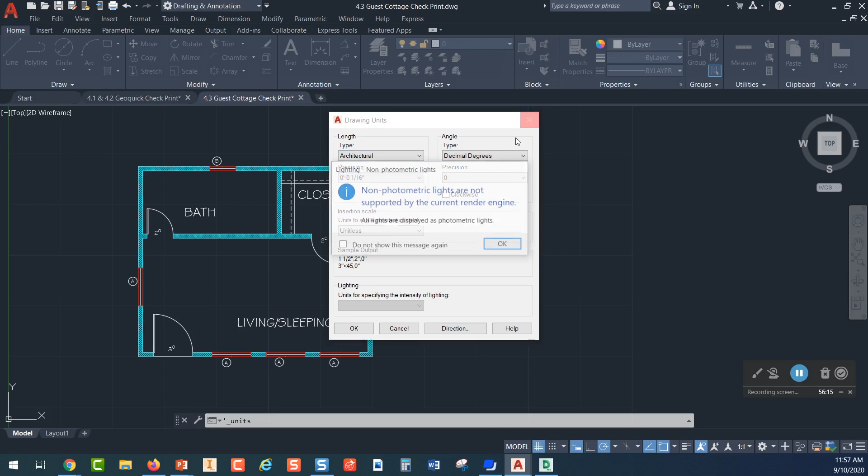It starts by going up here and going to Format, going to Units, and setting it to architectural units so that you can type in feet and inches and not decimal inches. If you're in decimal, it's not going to work. Okay, so guess what?

It starts by drawing a rectangle. So I'm going to pick on my rectangle command, and I'm just going to start a rectangle right there. And it tells you to draw a rectangle that is 18, and then you have to put the foot mark in. The foot mark is just to the left of the Enter key.

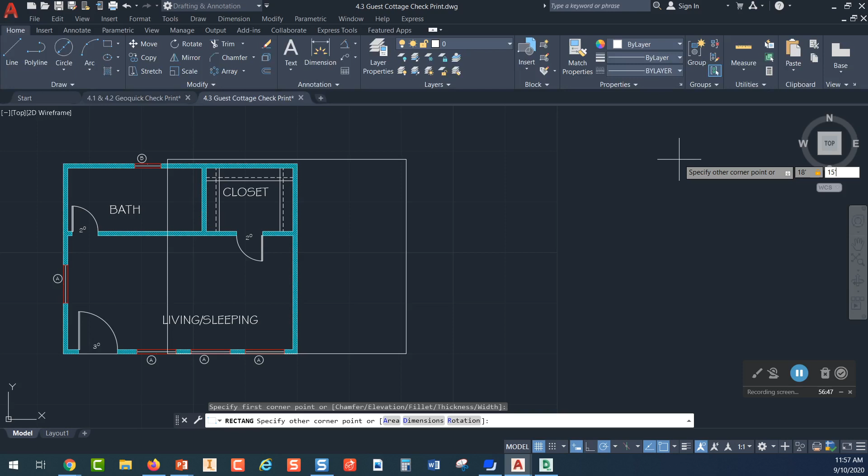So 18 feet, comma, 15 feet. So you have to put that foot mark in again, and then you need to press Enter. If you don't put the foot mark in, AutoCAD will default to inches, and it would draw that 18 inches by 15 inches.

Okay. So if you've ever seen the rockumentary Spinal Tap, they have this thing of Stonehenge that they built. I think they converted inches, and so the Stonehenge thing comes in and it's like 18 inches tall. I think they just didn't have their units right in AutoCAD when they did that.

All right, so we've got 18 feet by 15 feet. Now, the walls, it tells you, are 4 inches thick. So how do you think you ought to put the walls in? If we were in the class, some of you would be saying, we're going to offset 4 inches. And I'd say, yes. So you come up here and you try to find the offset command again. It's the one that looks like a horseshoe with 2 lines, kind of showing you that it's offsetting.

Pick on offset. Does AutoCAD know the offset distance? No, not yet, because you've just started a drawing. So it says specify the offset distance. You would type 4. You don't have to put inch marks in, you only have to put foot marks in. So you just type 4 and press Enter. It says select the object to offset. You pick that, and are the walls on the outside or the inside? They're on the inside, so you move anywhere inside that rectangle and pick. And so now you've got your walls.

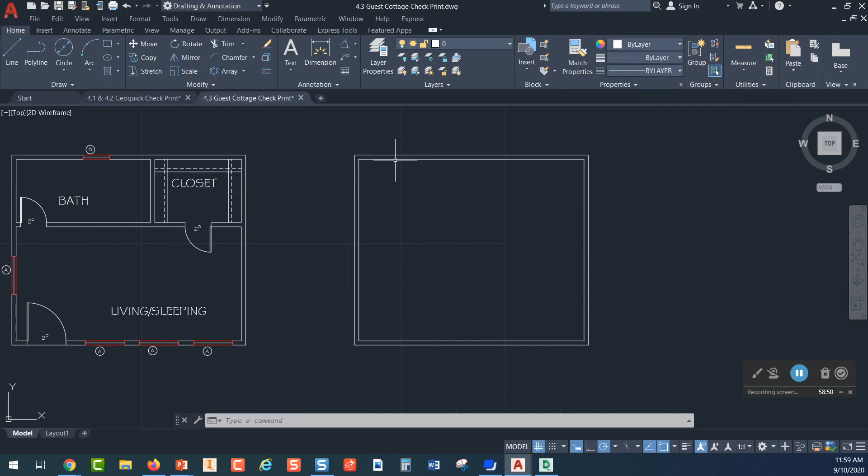And so to show you, I'm going to delete this guy out right there. You see my walls? I've got an interior wall here and an interior wall here. The way I'm going to put those walls in is I'm going to explode these rectangles. So I pick both rectangles and explode them. Now they're separate entities. I'm going to go back and use the offset command. If you look at the bottom of page 228, you can see the distances for those offsets.

So for the first one, I pick on the offset command, and it says specify the offset distance, and I type 5 and a foot mark and a 4. That's all I have to do, 5 feet 4, and press Enter. Then it says select the object to offset. I'm offsetting this top edge, and then I just need to move below it anywhere. So I've just offset that line 5 feet 4 inches.

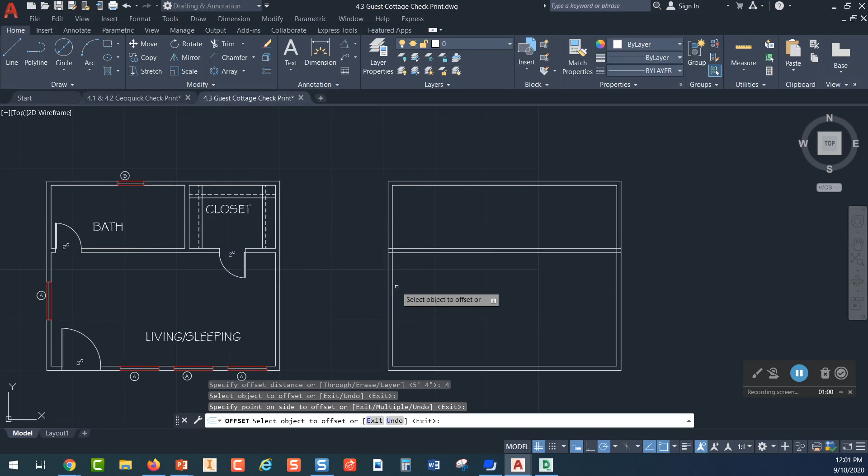And then if I look on page 228, I can see I need to offset that 4 inches below this line right here. So I'll go back to offset. It says specify the offset distance, type 4 and Enter. Pick right there and pick below. And there's that wall that goes all the way across right here. Okay. Now, look at the corners.

When this wall comes together, we don't want to have those lines sticking through there. So how are we going to take those out? You're going to trim them. You don't erase them; if you tried to erase it, you'd erase the entire line. So you've got to use trim, and you would go in here and trim that wall just like that at every intersection. Go over to the opposite side, go in here and trim. Right.

I make it look easy. It won't be easy for you, but the video is going to help, and it's going to get easier to the point where by the time you do the capstone project, if you're an architectural student doing the architectural capstone, you're going to be able to draw a really complicated floor plan, put windows and doors in it, light switches, ceiling fans, dimensions, and then draw the front and side elevations. I promise you, if you stick with this, in like 9 weeks you'll be able to do that.

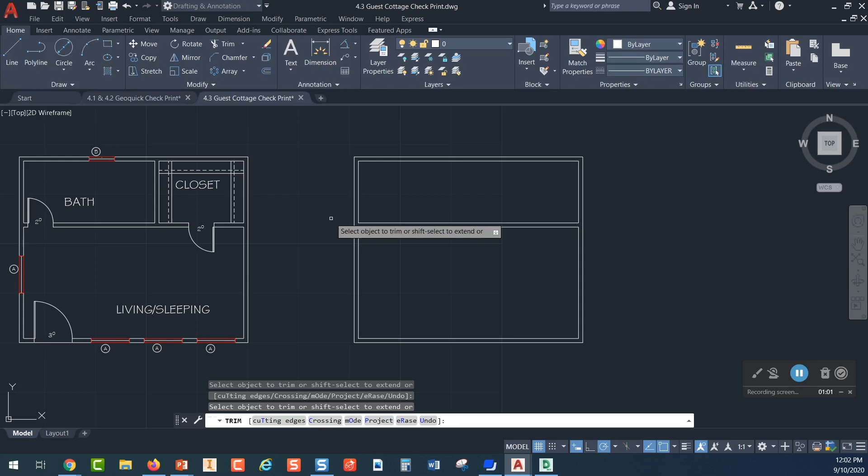So don't get discouraged now. You're just a beginner now. You're going to pick this up, and all of you guys are young and your brains are very pliable. So you're going to do okay. Just hang in there with it.

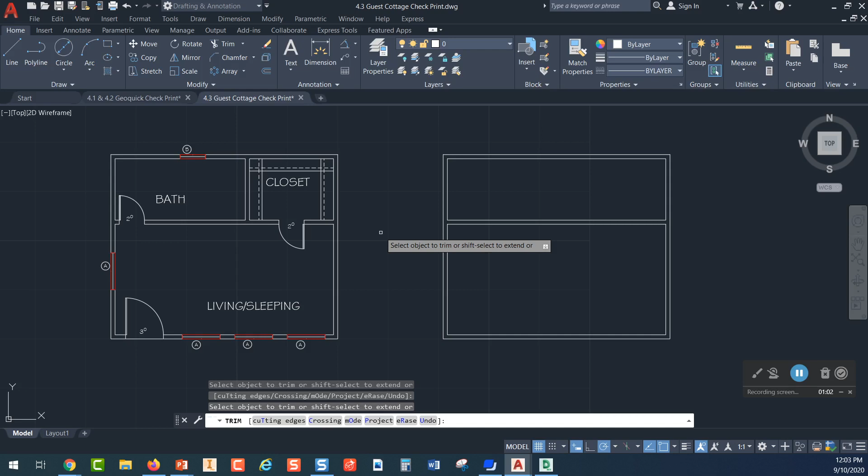Okay. Let's talk about Blackboard then, and where all these directions are and where all those videos are and everything. So I'm going to come down here and click on Blackboard. And let me see here. So this was what you saw when you clicked on Chapter 4, Module 1. So you click on that. I want to show you some videos that are in Chapter 4, Module 1. Now this is where you drew the dino pig.

You have a video here on AutoCAD's workspaces. Remember, that was that drafting and annotation thing we turned on. You have a video on the status bar. You have a video on ortho and polar tracking and on dynamic input. These are all things you probably should know, but when you drew the dino pig, you know, we were just mainly focusing on drawing lines.

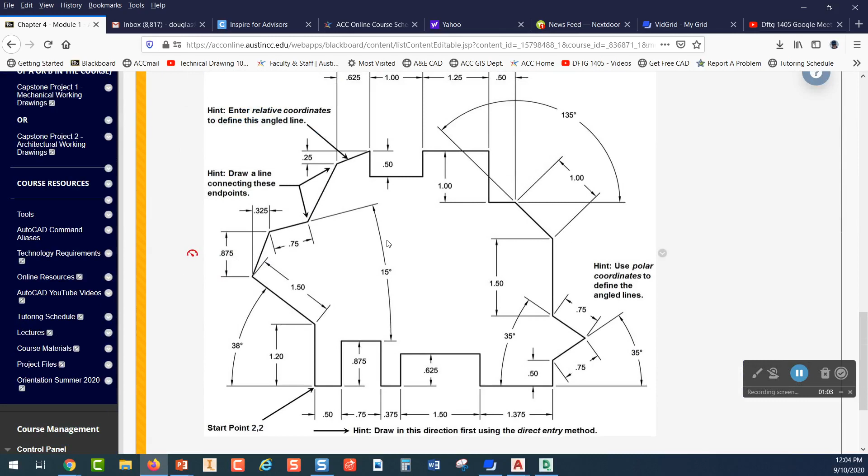But today I started talking about things like the status bar more, and workspaces and the interface and things. And these are all relatively short videos. And so I think these are really good. There's even a video on selecting objects in AutoCAD. And remember, I showed you guys about picking from left to right and right to left and all that. That's covered in this video right here. So these are some basic stuff, and this is in Module 1.

Now, what you're going to be doing today is clicking on Module 2, Drawing and Editing with AutoCAD. And you can read through here, you know, what it tells you to do, and then it says steps 1, 2, and 3. Well, we have a playlist. I made a YouTube playlist that has all the draw commands on it. So if you are having trouble figuring out how to use one of the draw commands, like circle or arc, you can pick on this and then just play the video for the arc command.

The modify commands, we've made a playlist, so we've got all of those modify commands like rotate, move, trim, offset, so you can watch videos if you're stuck on how to use any of those. Then in step 2, we have some videos on creating layers and some other things like creating AutoCAD text styles, where you'll go back and click on the format button and go to text style. So there's a lot of important information that you can find in Module 1 and Module 2 that if we were in class, I would have talked about every one of these. But since we're doing this remotely, you kind of have to go watch those videos.

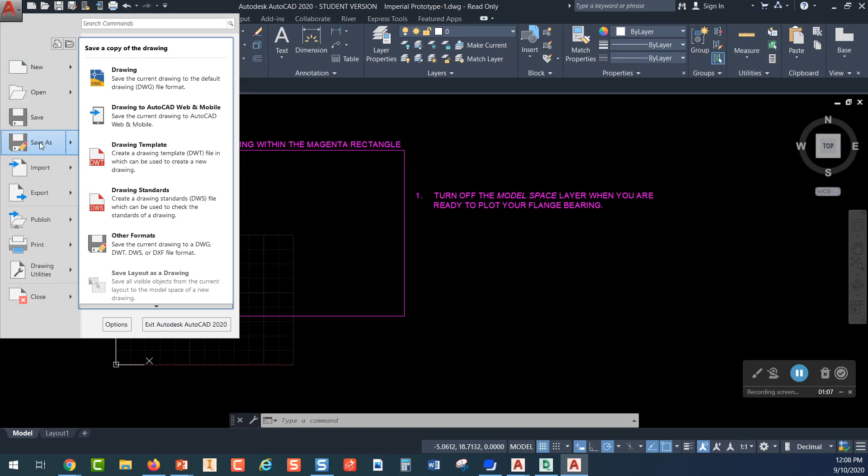Then what you want to do is save this Imperial Prototype in your home folder. And so, this is where we have recommended for you guys that you set up a Google File Stream. And then when you do that, it gives you a My Drive folder. When you double click on My Drive, what I recommend is making a folder that has your ACC EID and your name. And I'm going to show you guys where you can get the directions again for how to do this.

Once you make that folder right there, that becomes your main folder that you're going to be saving stuff in this semester. And then what I recommend is making a folder inside that folder called DFTG 1405. And then double click on DFTG 1405 and make another folder named Daily Work and make a folder named Capstone Project. Double click on Daily Work and right down here type Geoquick and pick Save. And you will save this Geoquick drawing.

So what you're doing is you're renaming the Imperial Prototype to being called Geoquick because that's the name of these 2 projects. We call it the Geoquick project, but it actually has 2 drawings in it, the gasket and the cam that I was showing you guys. So you pick that and you pick Save, and when you do that, right up here, instead of saying Imperial Prototype, it's going to say Geoquick, and it'll show you the path to your folder.

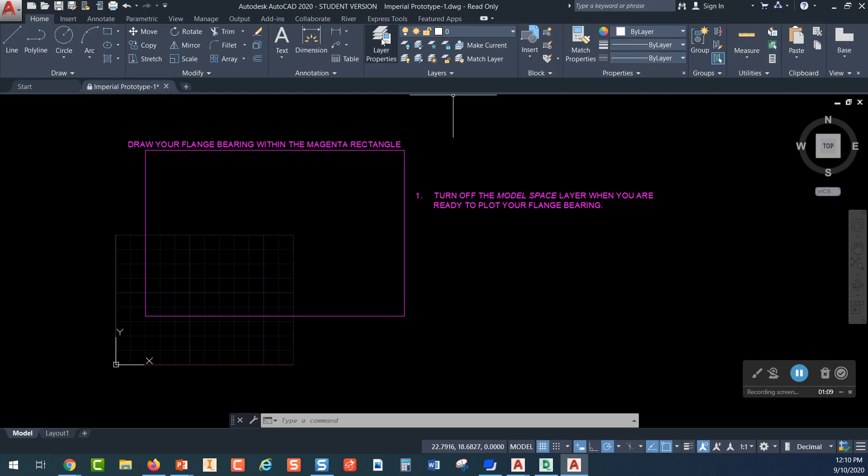All right. Now, I'm going to go back to Blackboard real quick. You see this link right over here on your left navigation that says downloading CAD software and managing files. When you click on that, if you click right here for Home Folder Management Guide, our tech support guys wrote this document up to show you how to install Google File Stream. And this allows you to save drawings out there on the cloud using your Google account.

Because ACC has given every one of you space because you have a Google mail address right through ACC. And ACC has paid for us to have all this stuff. So you can set up a Google Drive. It'll tell you how to install Google Drive. And once you get that installed, it will tell you to go into My Drive, and let me keep going here. It will tell you how to create your home folder.

So that's where you make a new folder, and eventually this is where you're going to type in right here your student number and your name. And then, so it'll look like that. And then inside that, I would make another folder named DFTG 1405, which is what it shows you here. So I know that's a lot, but I'm just saying that this is available to you in Blackboard if you want to get set up.